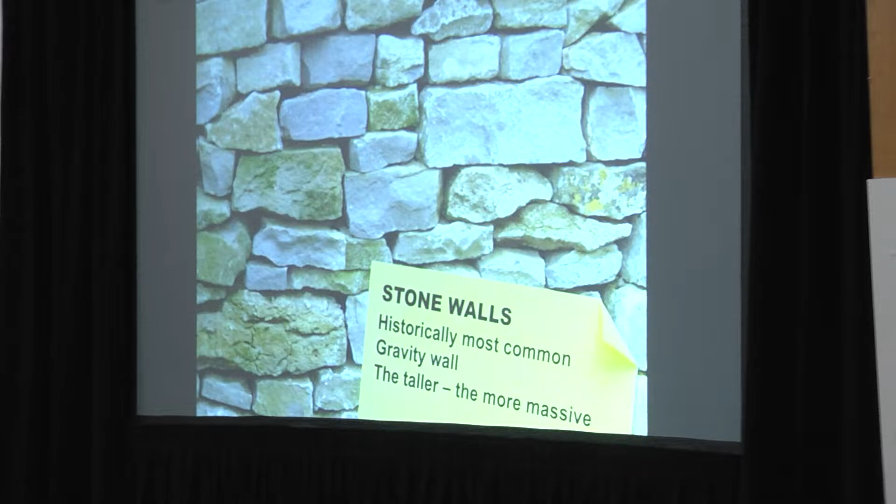All right, and then we got stone walls. This is like the old school. You still see them in St. Paul. There's lots of big gravity stone walls in St. Paul. Problem with these walls is that in order to push against the forces that are trying to knock them down, at the base, they have to be really wide, right? So you might have a 24, 36 inch wide base on these gravity walls, because that's how much weight you need to resist the force that's coming in behind them. So stone walls can get really expensive, especially once you get up above 3-4 feet.

So here's the traditional timber walls. Are any of you guys still building timber walls? A few guys? Cool. The wood is different, right? It's more of a pressure treat. It's not the creosote. It's not the same stuff. Doesn't last quite as long as the timber walls did 20, 25 years ago. When we do cost comparisons on them, it seems like block is a much better long-term investment. But there are certainly still applications for these. I've gone in and matched up and repaired timber walls. I try to talk people out of them.

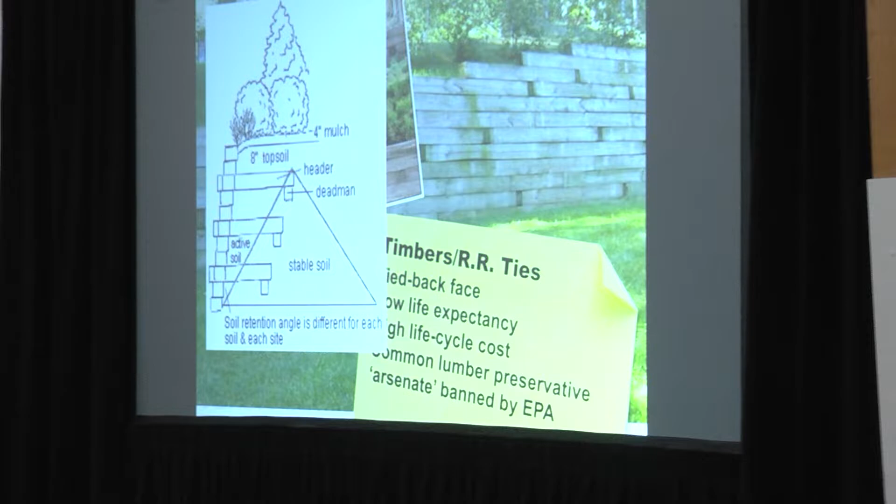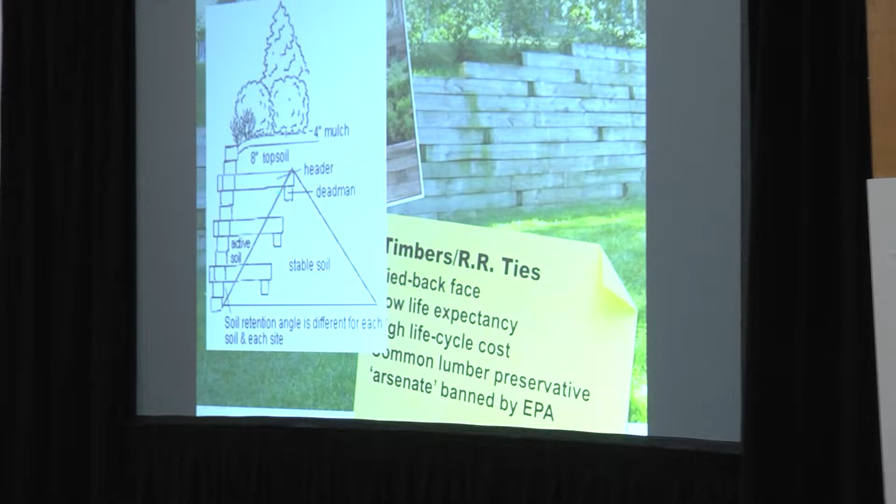All right, so a lower life expectancy. Here's the side profile. When we get into engineering too, we're going to talk more about this angle of phi or shear plane. That's like a phi. Have you guys heard that term? Angle of phi, failure plane, shear plane. It's got many names, called a lot of different things, but basically it's the natural angle at which any soil will lie. So we'll talk a little bit more about that when we get into engineering, but the main thing here is that our dead man anchors are getting back into this stabilized soil or sustainable soil.

All right, and then you got mortared walls. Mortared walls are going to be expensive. I don't know, might be up $90, $100, $110 a square foot for a mortar wall. You have to have a frost footing here in Minnesota because of freeze heave. So it does add a lot of cost, especially on shorter walls. Mortared walls, a different discipline, right? You're doing a block wet set and then attaching a veneer to the face of it. So it's a lot more labor intensive. Lots of codes on those for drainage and weep lines. So if you are doing those, make sure that you check your city codes.

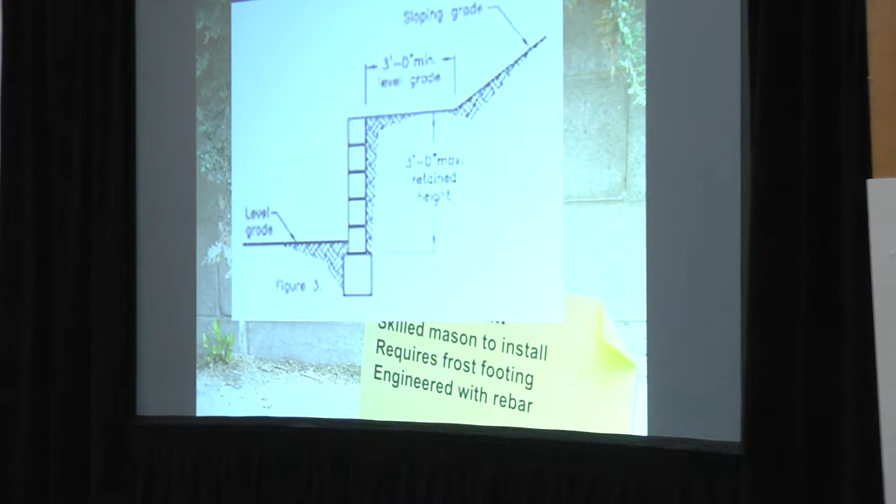And that's something that blew my mind when I first started using VERSA-LOK because, 20 years ago I was buying whatever it was, Menards block, and you'd have to break the back lip off. And then, what do you do about the setback, right? You're going to glue cheek walls 3-4 feet tall. It gave me fits, and so that's one reason VERSA-LOK is such a fantastic and flexible product, is that you can use the same block to build the retaining walls as you can the steps. You can do them vertical, you can do them with a setback, just lots of different options.

So VERSA-LOK is a gravity wall system, reinforced up to, we've built walls 40, 50 feet tall. I've been down to St. Louis, I can't remember if it's St. Louis or Kansas City. We're holding up a Walmart. The retaining wall is like 50-something feet tall. A fantastic product for going tall if you need to.

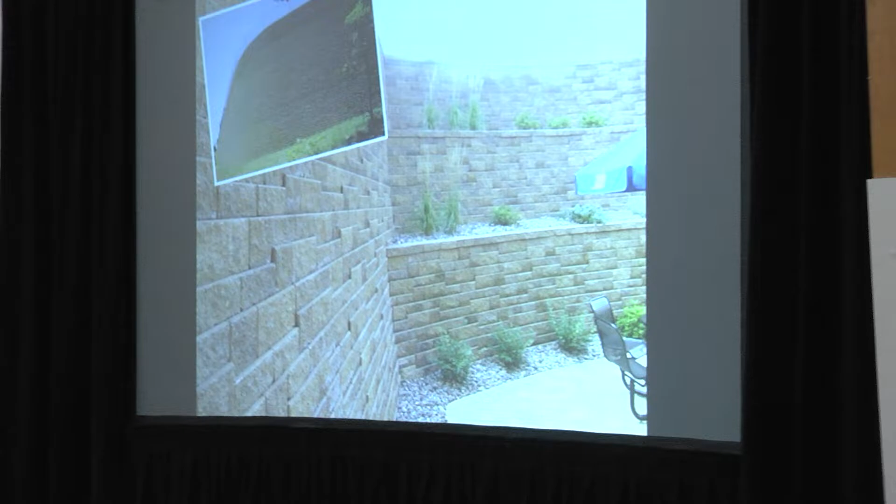Main thing I've found helpful when I'm explaining to younger guys that haven't done a lot of mosaic walls is think about those 4 blocks as 1 panel, right? So instead of thinking about, okay, I've got 6-inch block, 4-inch block, trying to add that up and how you're going to do step ups and step downs, all that stuff, don't think about those panels as 4 separate blocks. Think about it as 1 block, right? Once you pin it together, it's got that same structural integrity.

Weathered block is nice. It's a sales opportunity, right? Upgrade. We charge more for weathered block, just like stores charge more. My daughter came home with a new pair of jeans the other day, and they had holes everywhere. I'm like, I hope you got a deal on those air-conditioned jeans. It's January. Well, this is the same thing.

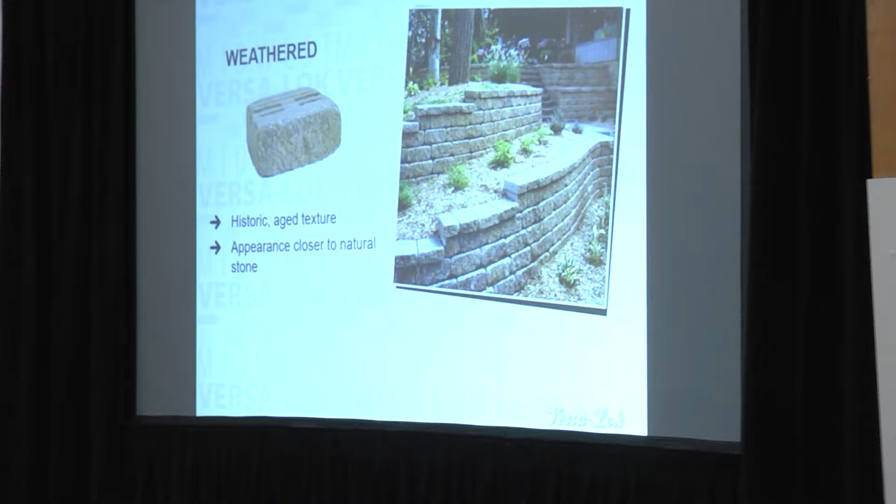We beat these blocks up. So they get tumbled a little bit, and it just gives it that rolled edge, kind of an old colonial look. So when I'm designing a project out at a cabin or maybe even on a historical property, an older house, a lot of times I'll look at weathered block and see if that's an option that fits my client's needs.

It just makes things so much easier when you don't have to think about, well, how many of these blocks do I need to order, right? You can just order a ton of standards, and if you've got one of these crackers, or if you've got a guy that's really handy with a hammer and chisel, you can modify that block on site to do a lot of different jobs.

And that's one of the things that really attracted me to VERSA-LOK starting out, is just that you don't have to worry about, oh God, we're out of corner units, right? Because what's happened over the last couple of years, we've had supply chain issues, we've had manufacturing issues, labor issues, all this stuff that's kind of compounded post-COVID in this world we live in. It's getting harder and harder to get special pieces.

And that's one really nice thing with VERSA-LOK, is that you do not have to order special corner pieces. You can split those blocks. You can split them to make odd angles. So if you need to do a 40-degree angle, you can split that block to accommodate it right on site. You don't have to pre-order any of these specialized blocks.

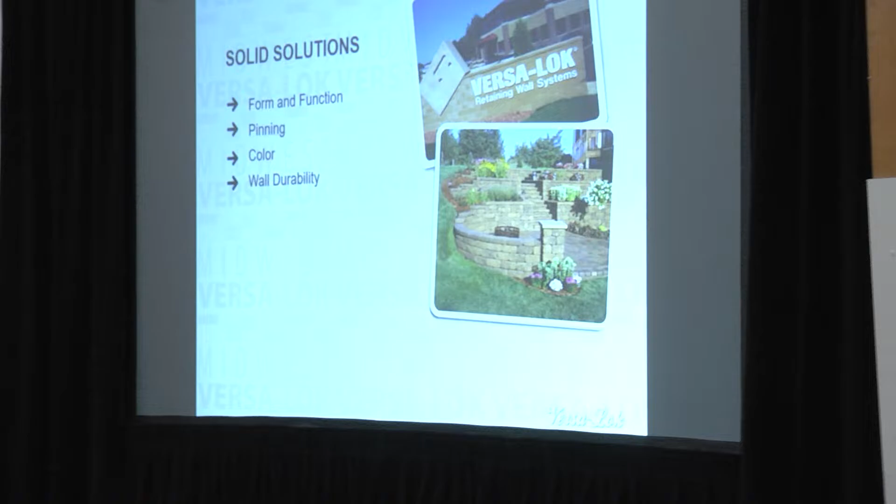Of course, we're a solid block. There's no hollow cores on the standard VERSA-LOK workhorse block. It's a solid concrete. That's what allows it to be split and modified. You don't have to worry about hitting that center void in the middle of the block. So you can split off center with them, and that's something we'll talk about a little bit more when we get into the freestanding applications. No cores, no lips, no mortar, no frost concerns.

So, some guys do pour footings. I've seen guys pour footings for small 3-4 foot walls. We refer back to the NCMA guidelines, right? And is anybody here doing the NCMA certification? Going to take the test and get certified? NCMA recommends just a gravel base. So, again, no requirement to dig way down and do a 4-foot frost footing. You can do a 6-inch gravel pad. We'll talk about how you can use that same procedure to do stairs, retaining walls, freestanding walls. It's all kind of the same game.

Straight face blends with surroundings. So what we're talking about there is, we don't have the old diamond-shaped retaining wall blocks anymore. Straight face just has cleaner lines. And that's one thing, again, with VERSA-LOK. You get really nice, clean lines and good consistency.

The worst thing about building with some cheaper blocks is that you might get one block that's 5 15/16, and you might get one block that's 6 and 1/16, whatever it might be. But variations in height kill me, because then you're shimming these things. It's a huge pain in the butt. That's one nice thing with VERSA-LOK is the height consistency.

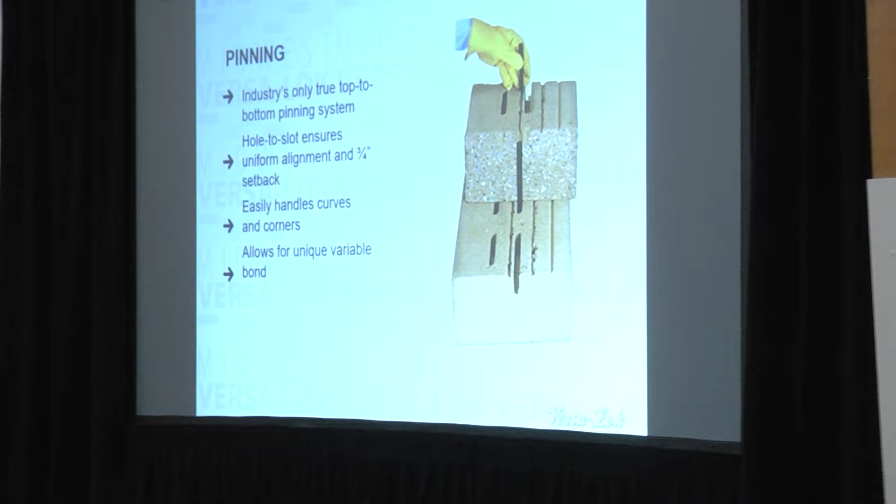I think this is going to show us that we can stack with a variable bond. Doesn't seem like that big of a deal unless you've built some big walls, right? You start doing corners. When you split these corners, you end up with an 8-inch wide block on this end here. And so it's real nice because it's 8 by 12, so the 12-inch side isn't gonna be on a perfect half bond. And when we say half bond, this is what we're talking about. You can see that this line right here cuts the block below right in half.

You can stack VERSA-LOK structurally sound on a quarter bond, which means you only have to have 4 inches of overlap one way or another. And the reason that's so important is because the pin that goes in here needs to drop into this block. Every block you pin needs to get pinned into 2 blocks below it. That's just the general rule. If you've got this block pinned into just 1 block below it, you get no structural integrity there. Those 2 blocks are just going to want to tip forward. So we're always trying to create a bond.

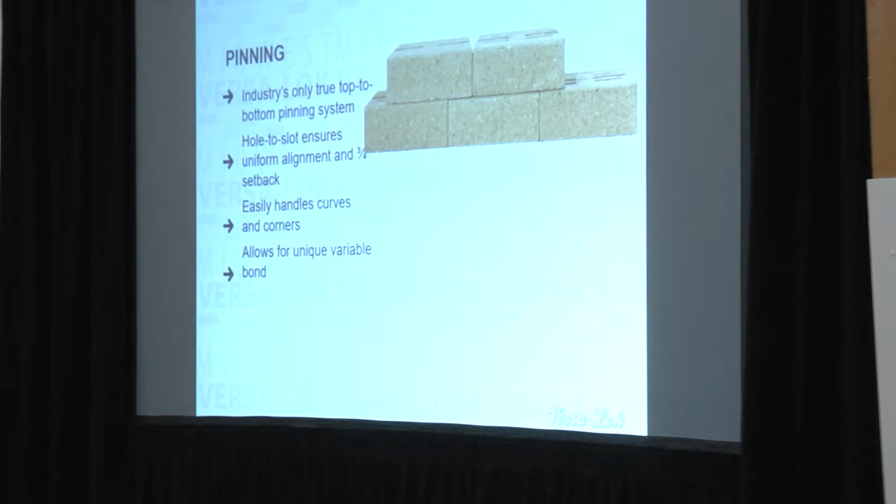And you can see 4-inch, 4-inch would be a quarter bond on a 16-inch wide block, and that's what we got with VERSA-LOK: 16 inches wide, 12 inches deep, 6 inches tall. So right here we're looking at a quarter bond with 4 inches of overlap, and again that's enough to get those pins down into 2 blocks below. Same thing is true with mosaic. You can actually pin, this would be probably more like an eighth bond almost, because all you got to do is get that 4-inch overlap right here.

This little cobble block, that's a half block, that's still pinning down into 2 blocks below it, right? And the same thing with the standard. The standard is getting pinned into 2 blocks below it. The only deviation with the mosaic is this little weird guy right here gets pinned into 1 block below. But because we're getting pins coming down and breaking these vertical lines, the engineers gave us the thumbs up on that. So that's the mosaic system, but again, variable bond pinning is a big plus when you're building large walls.

Kind of slide that around. That drives me crazy because we've got a line coming up through 3 vertical blocks. Anybody think that's okay? Yay, nay? When I look at this, it drives me crazy, but the engineers say it's cool. You can sign off on that. And it's because we're not looking at this as 4 separate blocks. We're looking at that panel as 1 large block. So even though that line comes up through part of it, this accent block breaks that bridge. And so you can go ahead and stack these things just like that.

Would I do that? I don't know. Looking at it drives me crazy. But again, engineers said it's okay. You got the sign off on that, so you can stack that wall up just like that if you prefer. It's closer to a half bond. And as an example, now we've got these 2 vertical blocks here. We've got the jumper, but this line is still in line with those 2 blocks below. So essentially, it's the same thing we were looking at before. Catches my eye, but again, it's structurally sound.

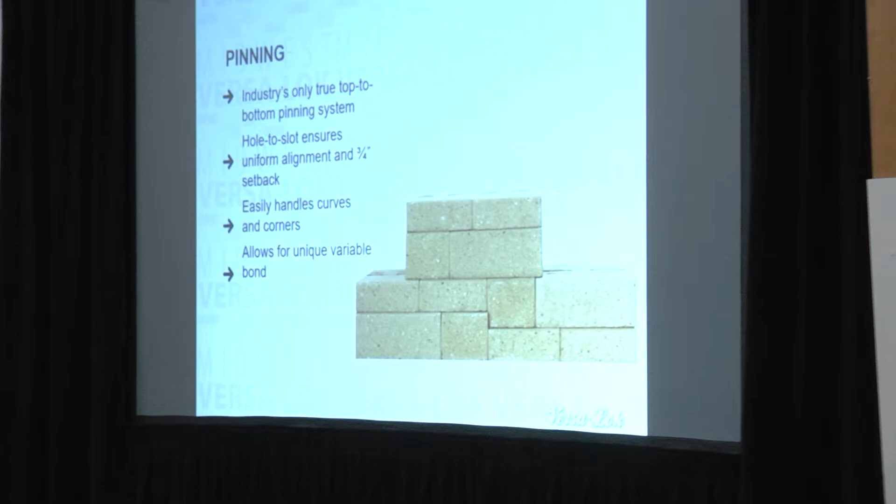Okay, so this is our square foot block. Square foot block, you do have to core fill. That's part of the engineering spec. So when you start reading into the square foot block and its capabilities, know that those capabilities are based on a core fill. So that's an extra step.

Anybody got any tricks? How many of you guys have done core fill blocks and have like a trick to keep the rocks from getting in those ruts or those spines of the block? So what I've seen a lot of guys do, and I don't build a whole lot of square foot walls, but if you look real close, what do you see right there? It's a little hunk of rope. So what they've done is they've actually run rope down through that rut because that's how you're going to pin your blocks.

And if you've ever had to get in with a screwdriver and wedge little clear rock pieces out of your retaining wall gaps, you know that that's a job nobody wants. So if you put a rope in here like that, you do your core fill, dump everything in, whip the rope out, and you've got clean lines. You're ready to stack that next row.

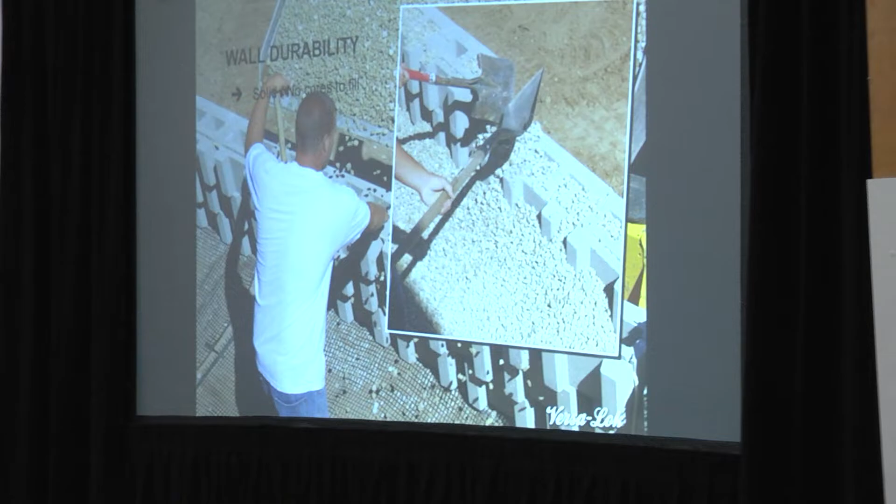Core fill walls are nice for drainage. You get a lot more drainage capability out of them. Again, it's just an extra step. A lot of times they're going to be lighter, so you can schlep them up on the wall a little bit quicker, but then you have to go back and do that additional step. Same thing as the standard block, high strength, low absorption, weather resistant.

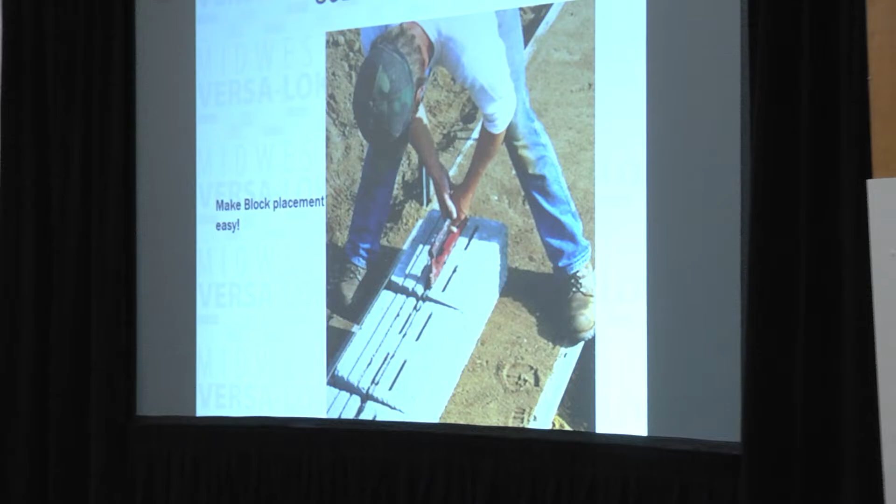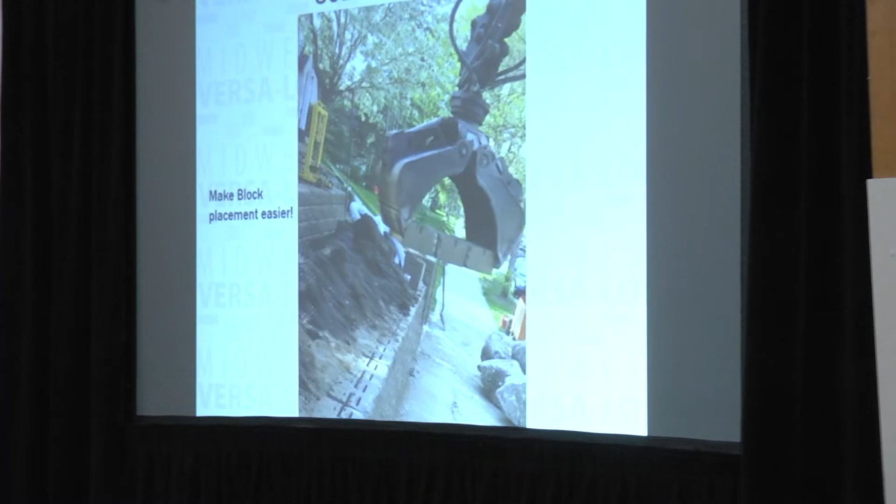Having that handle on there just allows you to be super surgical about how you set them, so you're not doing what I call a controlled drop, where you're setting your block, you're getting it close, and then you just kind of poof, let go, hope one corner doesn't hit first. That handle's a lifesaver when it comes to setting base. Pretty slick way to move them. Get a grapple bucket on there, and you can slide three blocks around pretty easy with that.

Every year it seems like blocks are getting bigger and bigger. You look over here, we've got Rosetta stuff. Some of these blocks are 2,600 pounds, so they're machine set. The nice thing about machine set blocks is that it's less manual labor intensive. In other words, the guy doesn't have to pick up every single block, schlep it, slide it around, score it, get it set just right. You have the machine do most of that heavy lifting.

And you're setting blocks that might be 2-3 square feet at a time instead of our 2/3 of a square foot standard unit. But with VERSA-LOK, you can transport several blocks, squeeze them together like that, and kind of do that cantilever.

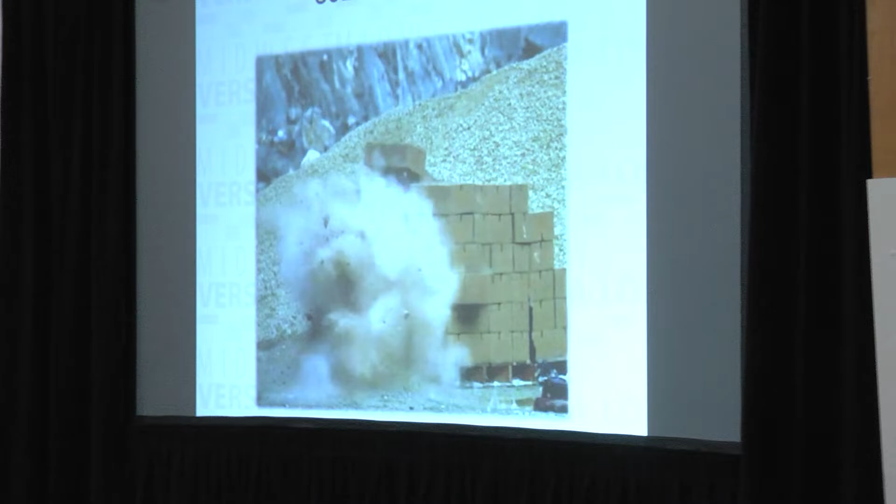I think we had the Mythbusters. You guys remember Mythbusters? Mythbusters launched a cannonball. I don't know what they were testing, ballistic speed or something. They launched a cannonball at these VERSA-LOK blocks, and I think the really amazing thing about it is how many of these blocks were still intact after this cannonball. You can see one kind of flying right now. I think that cannonball ended up in a house like 3 blocks away, if I remember right. Mythbusters got in trouble for that one.

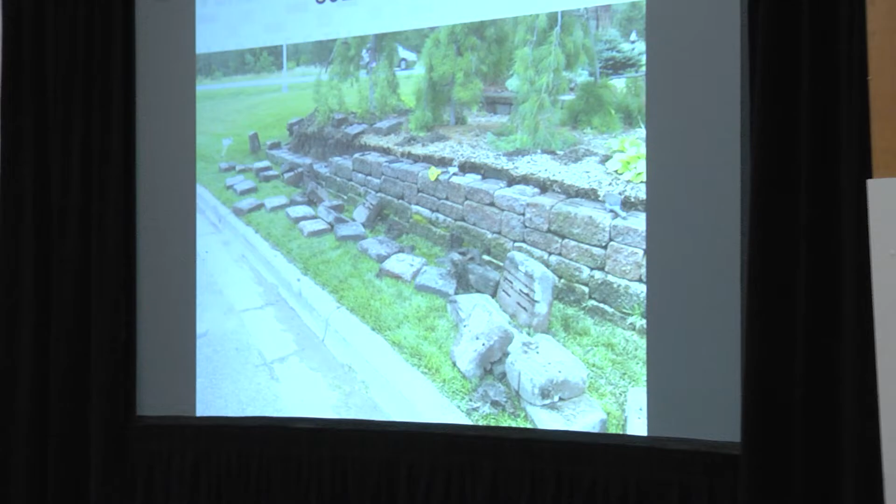Again, solid durability. We'll jump back. So, with a core fill block or a hollow block, if a car runs into it, it's going to break a lot of those blocks, right? And then you've got brand new blocks that you're trying to match from 10 years ago. Like we said, we strive for color consistency, but if you're talking 10 or 15 years, you're going to have to mix those together.

Well, this thing ran along the side of this retaining wall, and this is actually at headquarters in Oakdale. All these blocks could be reused. We had some glue on the capstone, so we did have to replace a couple of these blocks, but for the most part, they stayed completely intact.

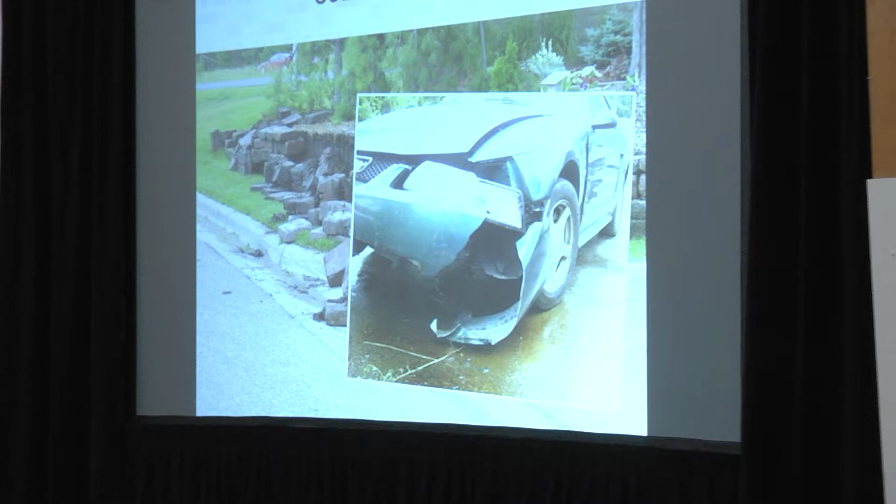So you can see this thing kind of being rebuilt. That's it after. See a couple new corner pieces here and a new capstone, but 95% of that wall is able to be reused even after you have an impact like that.

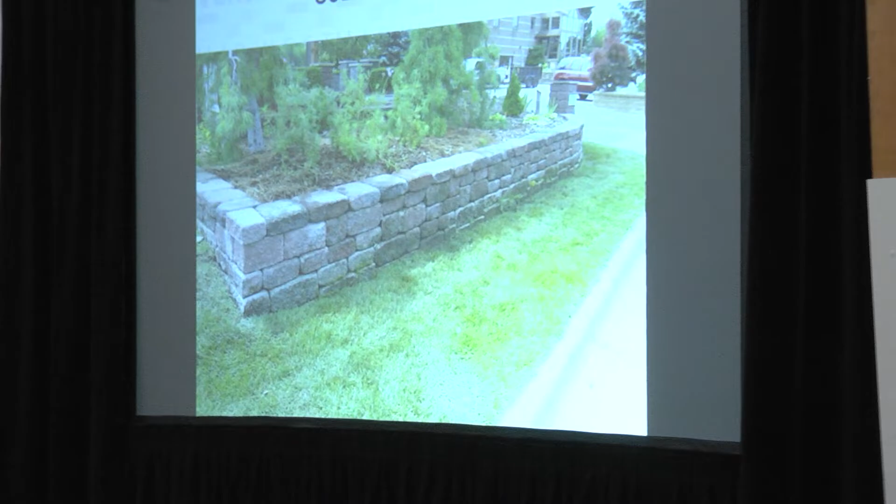If I remember the story right, that Mustang was a late night, 2 a.m. drunk driving stop. The cop tried to pop the cherries on, and the guy decided he was going to run, take off. Probably got going 50, 60 miles an hour on that little side road and spun out because he must have forgot his Mustang's rear wheel drive. So he slid into the retaining wall, smashed the car. In this case, I'm guessing that car was totaled, so the wall wins, because there it is, back up.

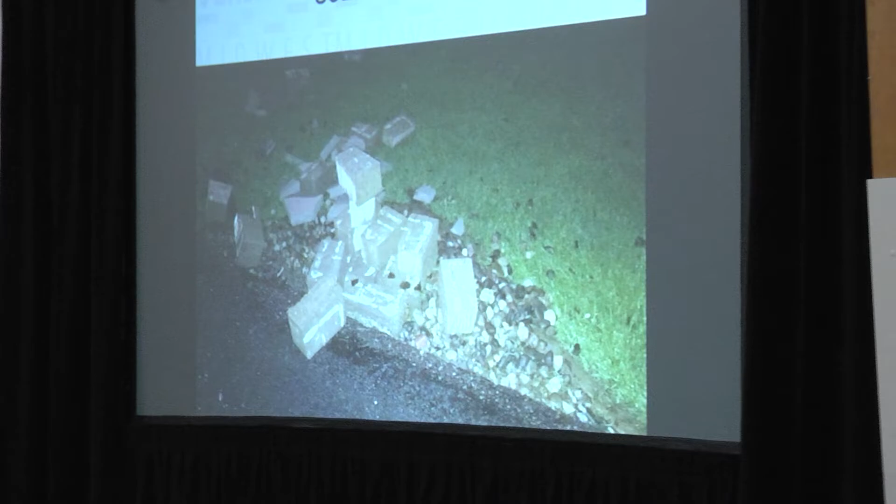And again, same thing with these mailbox pillars. How many of you guys are doing mailbox pillars? Easy money, right? The pillars stack up so fast once you base them out. But again, if it gets hit, you can just come back in and charge whatever insurance company is going to foot the bill for that. You can charge to just restack that thing.

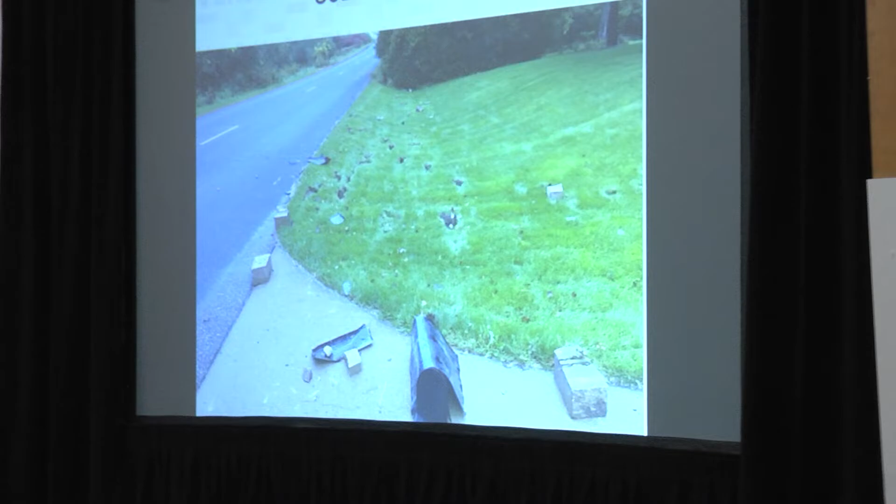And again, you can see there's parts of the car and the mailbox all over the place. But one thing you'll notice is these blocks are not busted. They're still in one piece. So again, you can just pick those things up and restack them. Yep, and that one looks like it lost the battle, battery hanging out there. But that's the car that hit the mailbox. So that dude had a bad day. And there it is, restacked, good as new.

All right, so we've talked about design flexibility, inside-outside curves, multi-angle corners. We'll get into more of the specifics on radius, multi-angle corners, stairs, all that stuff when we get into the engineering section. But for right now, we just want to touch on this stuff. A lot of this stuff's going to be repeat. When we get into engineering, I'll try to earmark some of the stuff that I know is on the NCMA certification test. So if you guys are going to be taking that, hopefully that'll get you prepared.

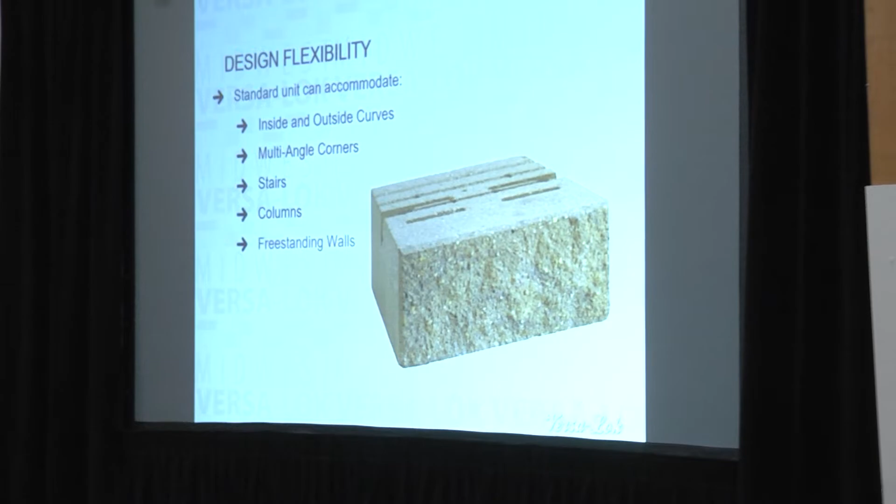Stairs, columns, freestanding walls. Personally, this is how I started splitting block. I used a hammer and a chisel, and I still enjoy doing it. It's still kind of fun. There's something caveman about it. I just like it. But you buy a splitter like this, and that's going to speed you up by 3-4 times. The ability to do that is huge, and that's, again, what we're referring to with design flexibility.

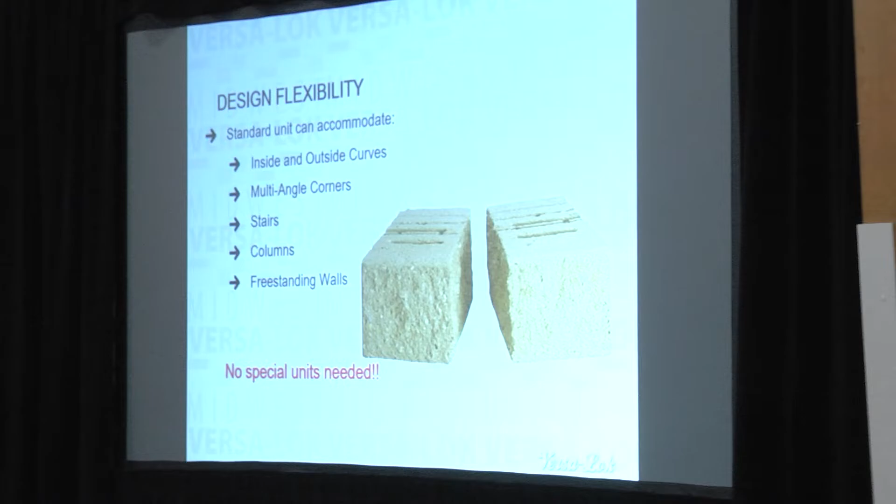You can do off-center splits, on-center splits. You can split the back end of this off and create a freestanding block. There's just tons of different options all brought together in this one simple little retaining wall block.

This is super important. Outside radius, max radius with VERSA-LOK is 8 feet. So if you're building a 3-foot tall retaining wall and you start your base out on an 8-foot outside radius, as you stack up, that radius shrinks, right? Because we have a 3/4 inch batter per vertical row.

So if you were building a circle planter, your second row above your base is going to be 1.5 inches smaller than your base row was. So if you start your base out at an 8-foot outside radius, by the time you get up 2-3 rows, your blocks are going to be splitting at the face.

Now we've got some tricks that we can do, so if you get stuck in a position like that, you don't have to pull the whole thing apart. There are some tricks of the trade there, but it's very important to make sure that your guys that are basing these walls out know not to set it at the maximum outside radius on that base row. Give yourself 9 feet. Give yourself a little bit of breathing room there so that as you build vertical, you don't start to separate at the face.

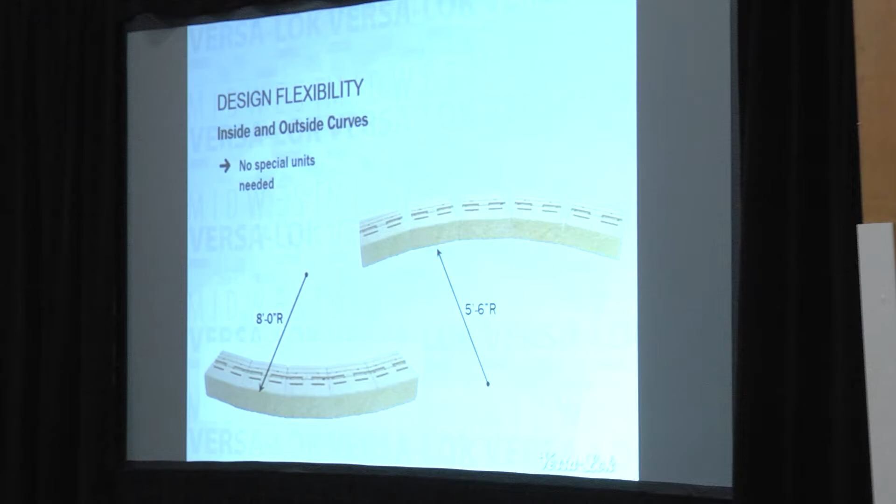Same thing is true with inside radiuses. So here we can turn 5.5 foot, which is pretty tight. And the reason that we say 5.5 feet is because we're telling you that you can pin on quarter bond. So if you can pin on quarter bond and you go tighter than 5.5 feet, your pins are going to start to drop into these gaps. So they're not going to give you any structural integrity, and that's why we say 5.5 feet is really the maximum inside radius you can do with VERSA-LOK.

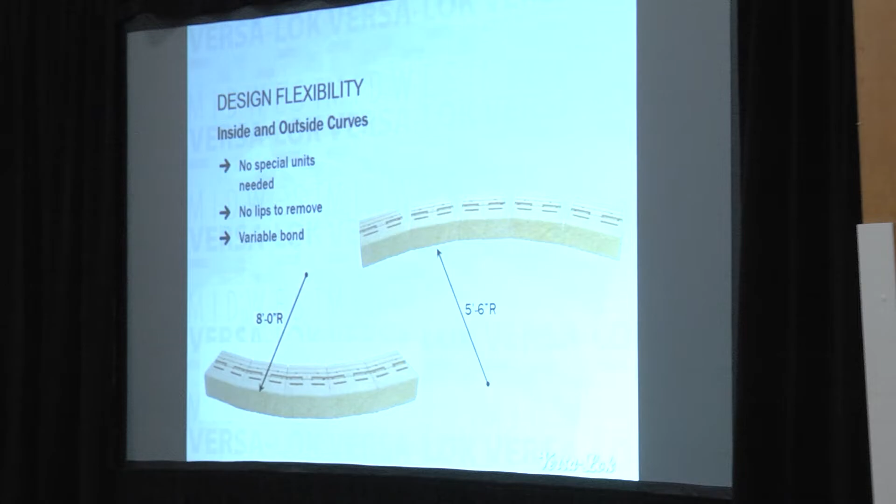No lips to remove. If you're turning a tight corner, you don't have to worry about modifying the block. That used to drive me crazy. I'd buy a new block, and then I'd have to beat the crap out of it with a hammer to get it to work. It's one nice thing with VERSA-LOK, there's no lips you got to worry about knocking off.

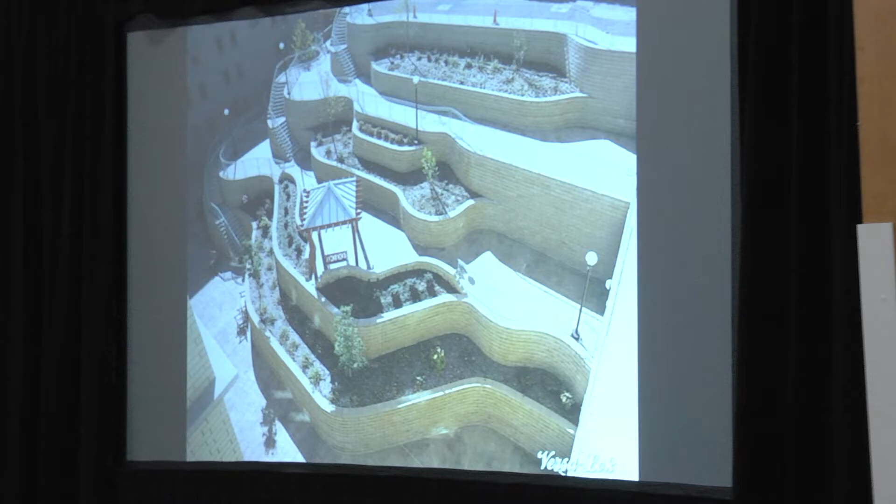And again, design flexibility. This is a picture we've been using for years, but there's so many different elements in here. We've got stairs, inside curves, outside curves, angles, freestanding applications. There's just a lot going on. As you master your craft and you get better and better at building these retaining walls, you'll build a new appreciation when you see a project like that, because there's just so much going on within just that little space.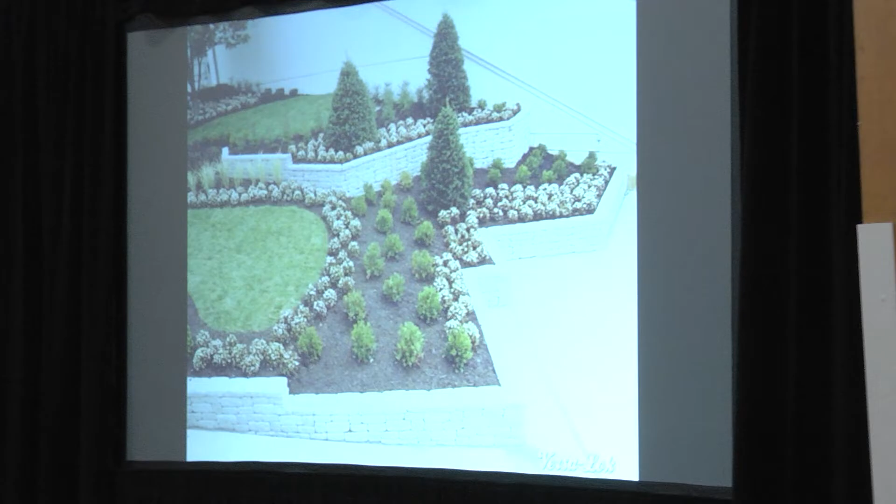Your design capability is completely, there's no glass ceiling on it. It's an open book. You can design whatever you want, and that's one thing I really find to be a lot of fun with VERSA-LOK, is that you don't have to worry about a lot of the same things that you do with some other manufacturers.

Inside 90s, this is probably the easiest VERSA-LOK corner to do. As you go vertical, you just want to make sure that you're swapping back and forth, right? One question I get a lot is, do you have to pin that corner? What do you guys think? Yay or nay? Do you need to pin it? Whoever said no is right, no pins required there.

I usually put a little dab of glue on this corner just to lock it together. I don't know if it's a necessity, but I just like it. It's cheap insurance. So I'll put a dab of glue on that inside corner right there as I'm stacking. I will pin the other side of the block. I'll drop a pin through here into this block, but then this inside part here I'll glue.

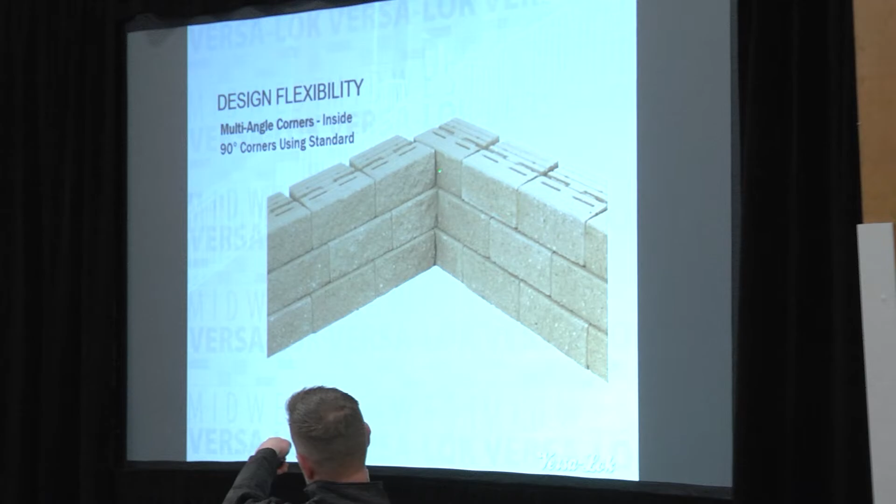One other thing that happens, and I don't know if you guys have built walls that have large inside corners like this, but as you stack, you'll see that this gap kind of gets created right in here. So when you go to cap this wall, you're kind of feeling like, wow, this block's hanging 6 inches over that edge. What am I going to do about that? Some guys do shim these corners. So if you got a block that you're breaking, whatever it is, you can stack another little row of block back there just to support the capstone.

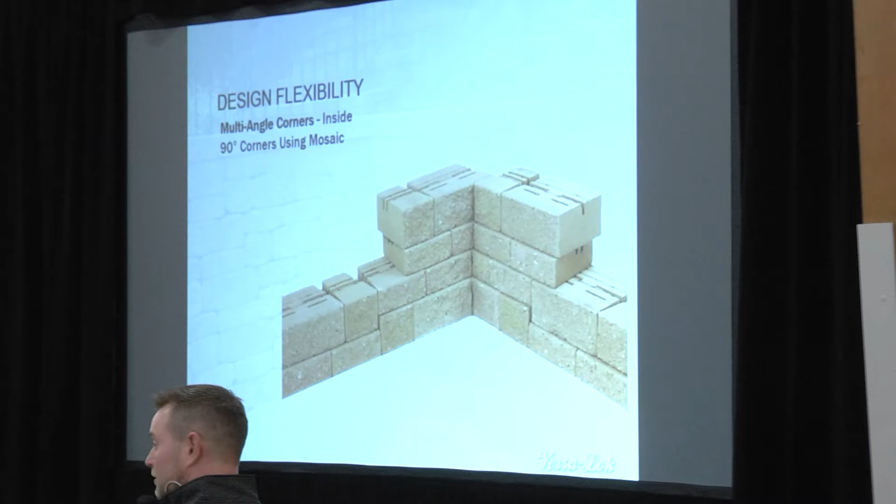And again, there's inside, outside. Same thing with mosaic. It gets a little bit trickier with mosaic, and that's again why we recommend the field guides. It's the same game with the inside corners, but it's a different game with the outside corners. We'll kind of run through that. So there's an inside and an outside.

And that's how you're going to split your standard outside 90. One thing I see here that I always point out is that we've got these lines on the top of the block, right? Those lines, they're there as part of the manufacturing process, but super visible in this picture. You can really see, it almost looks like a little tiger claw or whatever on the corner there. So what I'll train my guys to do is flip these blocks over when I'm building a pillar or an outside corner.

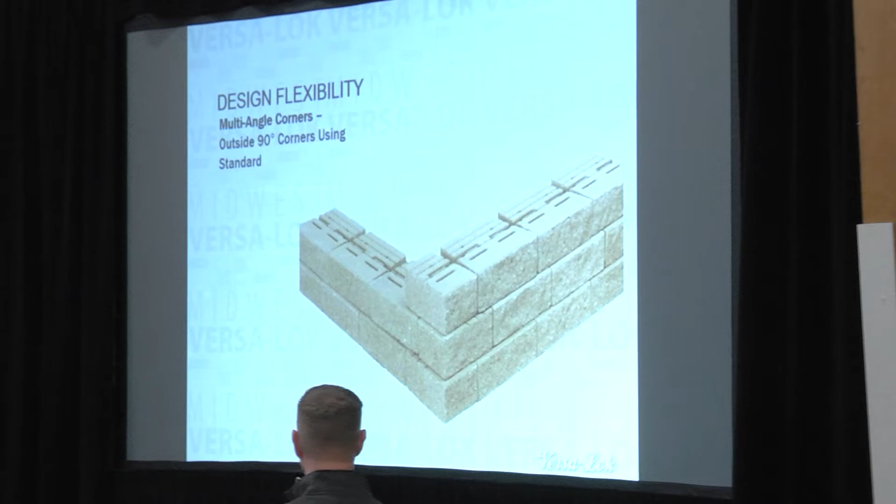And you'll see that right there. Here's the before, and there's the after. So you can see it's just a much cleaner look. To me, it's kind of that professional polish that separates the DIY weekend warrior guys from the guys that do this for a living. Minor detail again, but we're all here to master our craft, and any little tips that we can share with each other, it's a win for all of us.

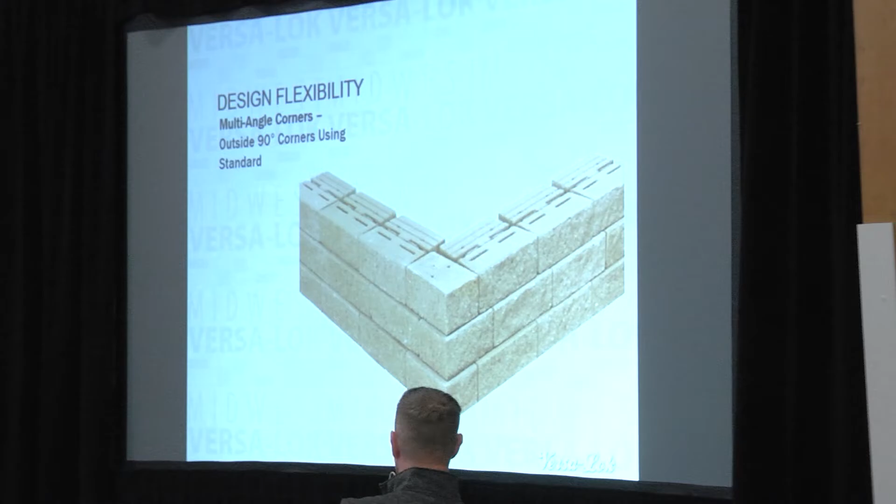So flip those corners over, and you can see right here again, that's evident right there that one's not flipped and that one's not flipped. So I look at that wall and I'm thinking Joe homeowner built it, or he hired the guy that mows his lawn to build it, right? He didn't hire a retaining wall company to do this wall.

Step downs. So we talk about two different kinds of step downs, right? There's a step down on the base of the wall, and then there's a step down on the top of the wall. This is referring to the top step down. So we've got this block right here that we split. That way it's got a rough face texture on 2 sides instead of just the face.

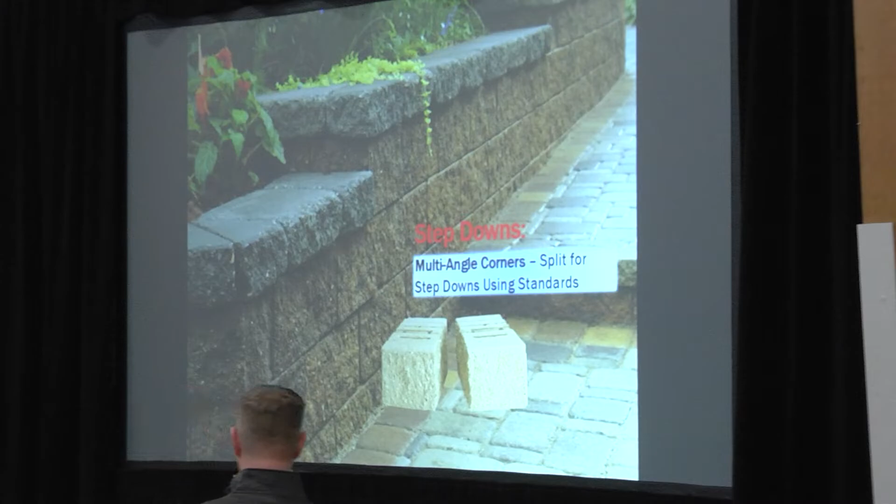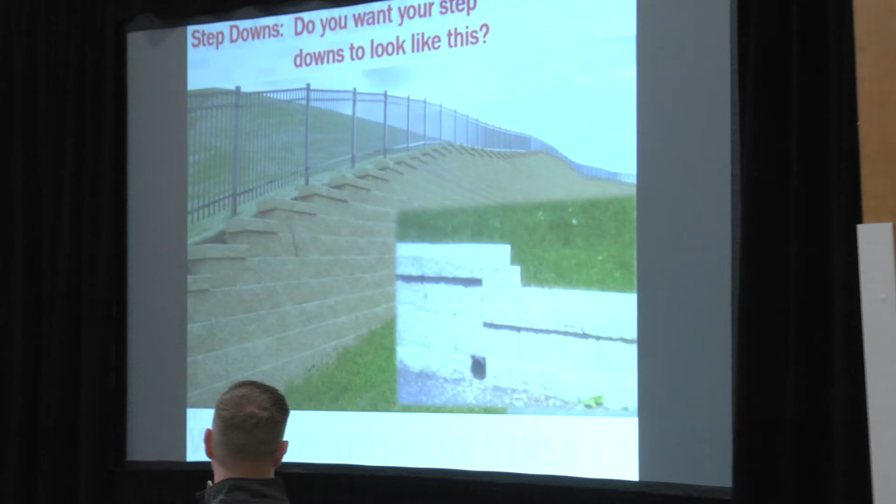Again, these grates, right? Talked about drainage a little bit. We just barely touched on it, but drainage behind these retaining walls is essential. And so you're gonna have a drain tile behind almost every retaining wall. There's a better way to do that, right? We get a grate, we cover that up, make it look polished, make it look professional. It's all these little things that you can do to separate yourself from the fly-by-night guys.

And there, again, that's the split face. It just looks finished. It's more professional. To me, that looks like a polished retaining wall. I can tell whoever built that and put that together knows what they're doing.

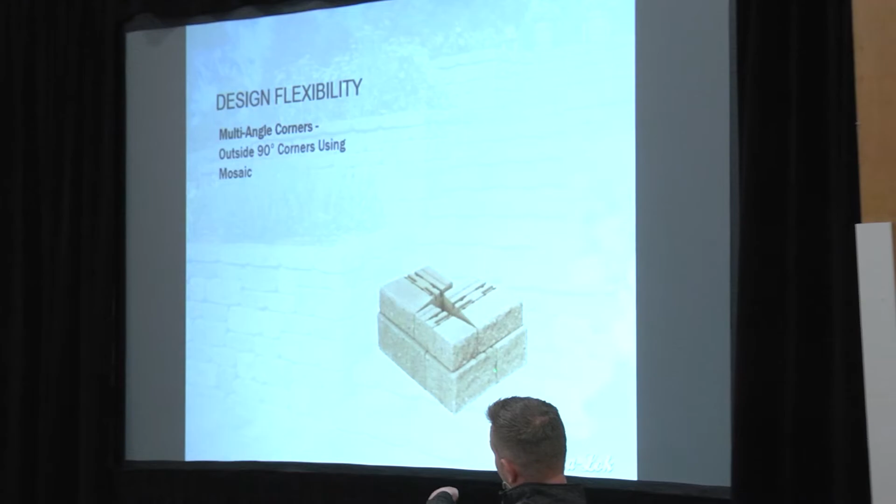So mosaic, I told you the outside corners are a little bit different, and this is what I mean, is that you're actually gonna have to split this accent block as well. And then you can see this corner split down here, we had to make a cut. So it's one extra piece of fabrication that you have to do when you're talking about a mosaic retaining wall. That's all in the field guide. So if you do have a mosaic wall, talk to your rep, make sure that you get a field guide.

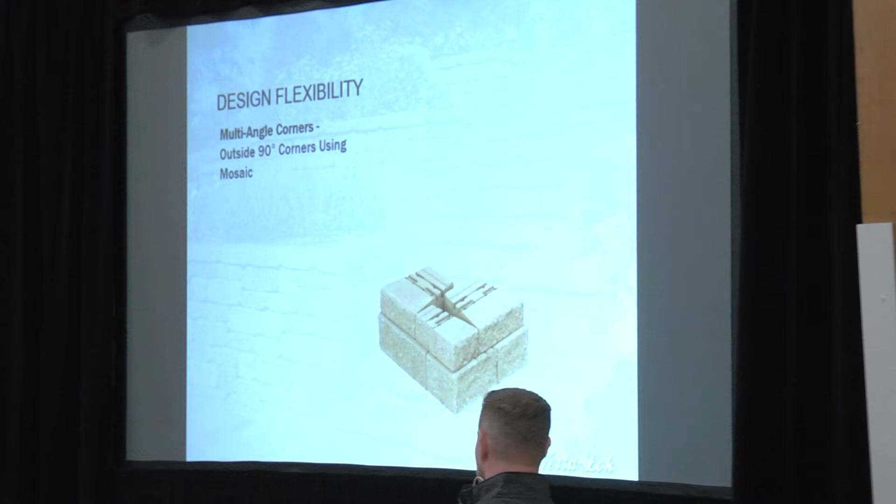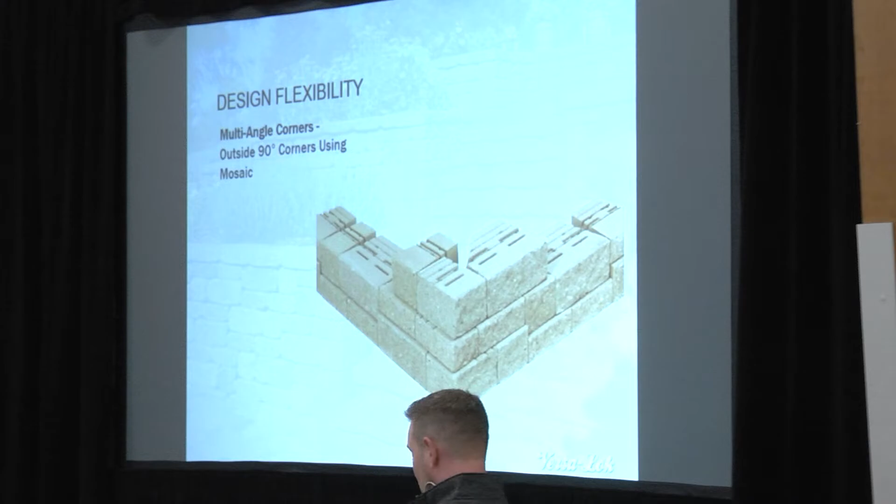Same thing is true with mosaic. Once again, we're gonna wanna flip these blocks over so that we're not looking at those tiger paws on the corner. But you can see how easy it is to stack that up. And again, why it's so important that you're able to stack and pin on a variable bond so that you don't have to cut little shim blocks in.

If you're working with a block that has to be on a half bond, you're gonna have a bunch of weird little cuts on corners because your wall length's always changing. Just like on a circle, the radius is gonna change with the height of the wall. Well, same thing is true when you're talking about these corners. So if you got a setback, these cheek walls are going to change in length, right? So eventually you're going to have to cut a weird little slug in. And again, that's just a big advantage with VERSA-LOK, is not having to cut little slugs into your block wall.

We're going to show you how to do this a little bit later. But when we talk about multi-angle corners, we're able to do 40 degrees, we can do 30 degrees, whatever it is. We can modify the block to fit the angle that we need, and it's as simple as just cracking this corner off. And now in this picture, we see this back corner is split off.

If I'm on site and I'm fabricating that block, I'm gonna cut that. I want that to be a clean line because you are gonna see that at the face of the wall. And you can see that right here. So that's gonna be a nice little cut. We've cut more of an angle here than we do on this split. That way you leave a little bit of gap in there. That way those blocks aren't trying to separate at the face. But again, one split, one cut, and you can modify this block to do so many different jobs.

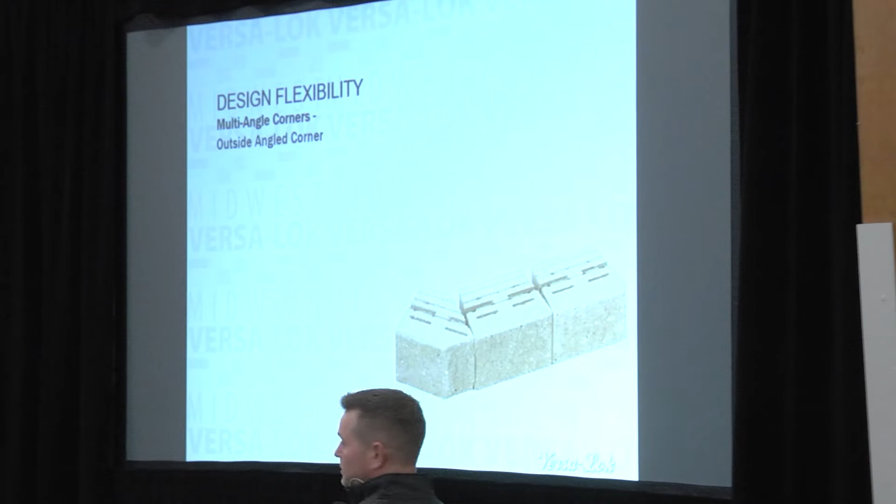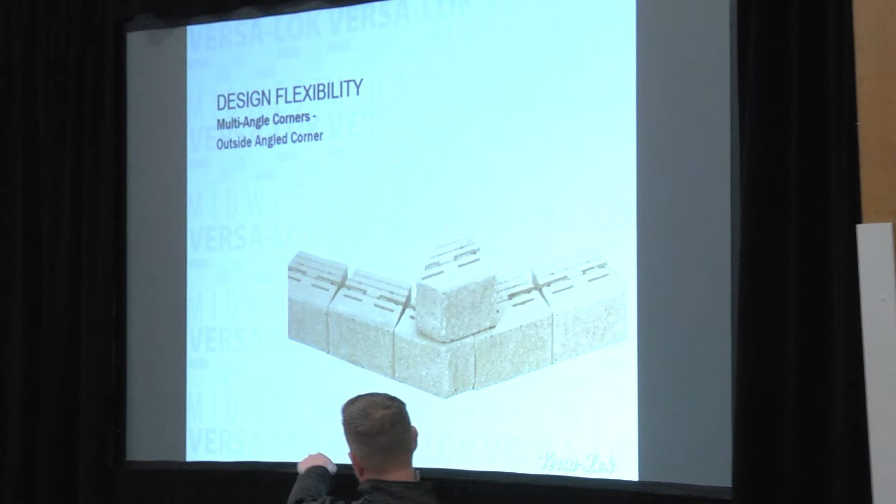When we're doing these, we're gonna make sure that we're overlapping our joints. Again, we're always trying to create bond. On most of these angles, it just so happens that little cut right there is gonna be about 4 inches. So I know it's a little bit out of proportion, but this should be about a 4-inch gap right here. That way when you stack that block on, you can see that the receiving slot is gonna take the pin. That way you've got structural integrity.

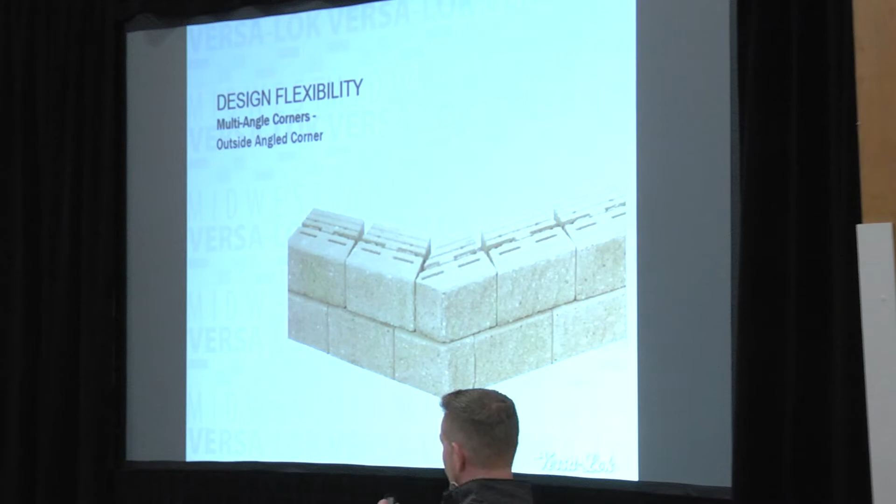So you're just gonna flip these things over, and again, I'd put a dab of glue on these outside corners as well. You're gonna pin the outside edges. Out here gets pinned. Inside, this is all just gonna get glued. So we're just swapping that back and forth.

You got to be careful on these, because if you try to split this, I want to go back. If you try to split this and you get too close to this slot right here, you'll see that it'll actually show through, right? And so at that point, you've ruined that block. That block's not good for anything but a door stop, or you can use it as a backfill item, whatever it is, but the block's toast. So you do have to be careful, make sure that you're keeping off of that little slot right there.

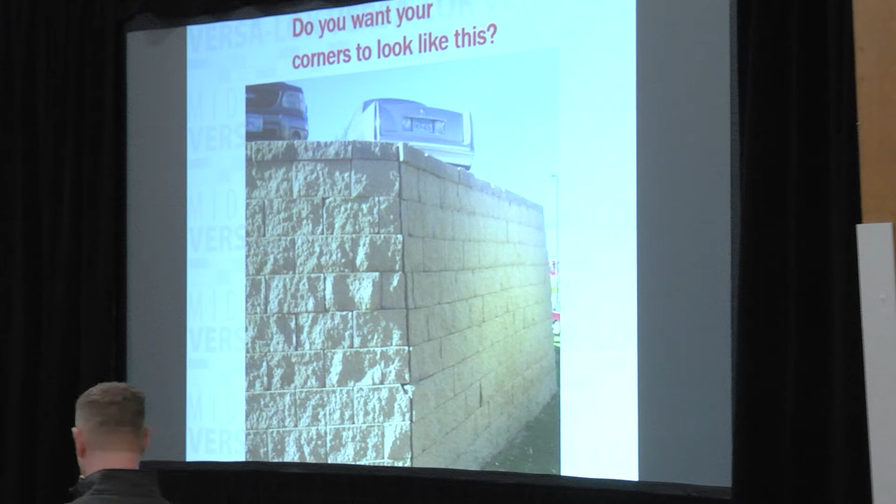So, you never want a vertical line on your corner like that. You're always trying to create a bond. I'm sure you can immediately see the difference between what VERSA-LOK's recommending for its outside corners and what this guy did. He tried to miter it. He tried to build it like it's a picture frame. Well, it's not a picture frame. It's a retaining wall. So bear in mind that when you're doing this, you never want to have vertical seams like that go up through 2 or 3 rows of block.

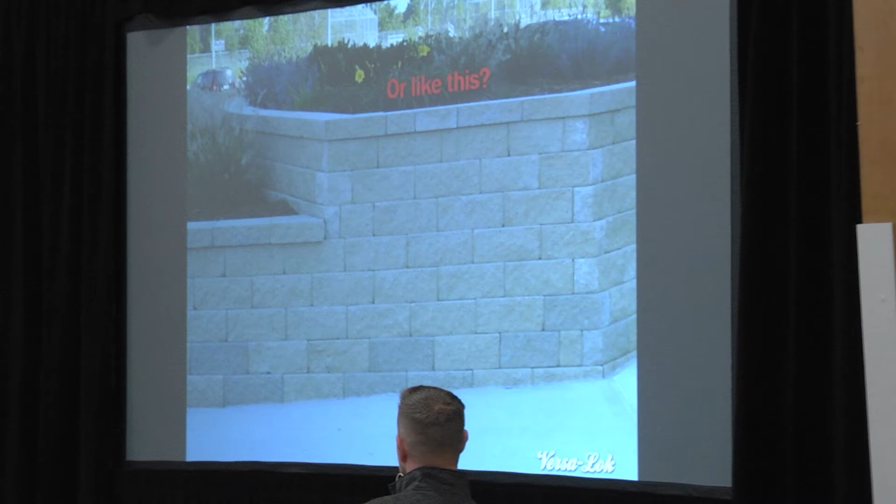But those little bump outs, you can take a chisel and you can kind of see it here that he's scraped away a little bit on that corner just to get it nice and flat. But again, you got to be a little bit careful when you're making those splits to avoid those bump outs.

Same thing is true with VERSA-LOK on inside corners. Multi-angle inside corners, easy to do. We're going to use a jumper with this system. So instead of just stacking like we did on the inside 90 degree, we're actually going to use sort of a bridge block is what we'll call that.

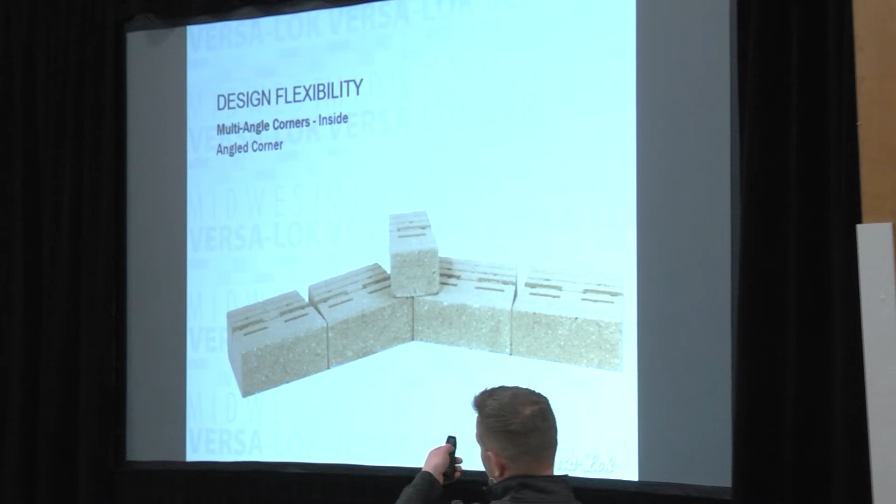This is another situation where I might actually base out another little block back here in that gap just to support the back of this block, depending on what the angle is. If you've got a really aggressive angle, you're going to have a really wide gap. So you might have to get something in there just to support it. I'd probably put a dab of glue on it, slap it together, cash the check.

And again, because we've got an 8-inch wide block here, we're immediately on bond. We're immediately on a half bond. We don't have to cut a little slug in. It's all done for us. We can just keep stacking.

And that's one thing with these walls too, as you build bigger walls, last thing you want to be doing is taking one hat off and go and put another hat on and start doing something else. You want to have assembly line, like I was thinking about Henry Ford, assembly line efficiency on your job sites where you've got guys doing the same thing over and over. Repetition, repetition. If you can have a guy just keep stacking, another guy pinning, you just keep those guys rolling, you'll have a wall up in no time.

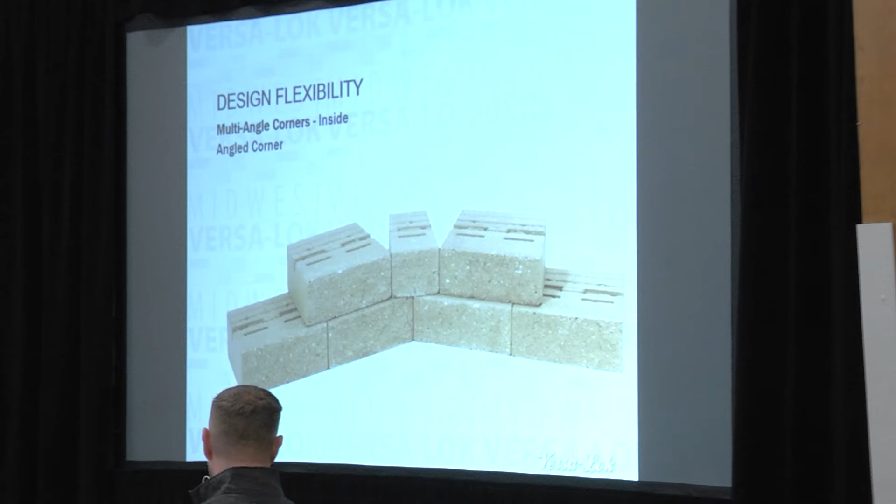But if you got to stop and putz around and break little pieces and cut little slugs, stuff like that, you got to go get the gas saw fired up. Jimmy probably put diesel in the fuel can instead of mixed gas. And so again, you got to change gears, do something different. It's always going to slow you down and reduce efficiency.

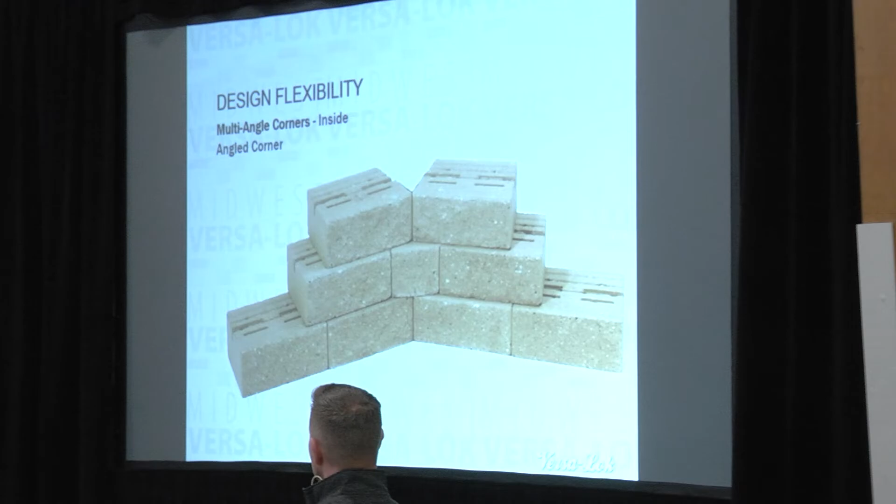So here, we just use the jumper, again, dab of glue, pin, and that wall's done. Really nice professional look on it. You do miter the capstones. I hate when guys leave big gaps up there on those angles. You want to make sure and get that cut as clean as you can, but that's really the only cut required because VERSA-LOK does sell these cobble units. So you don't even have to cut those. Those you can just pre-order if you want to. If you don't feel like pre-ordering them, you can modify the block on site.

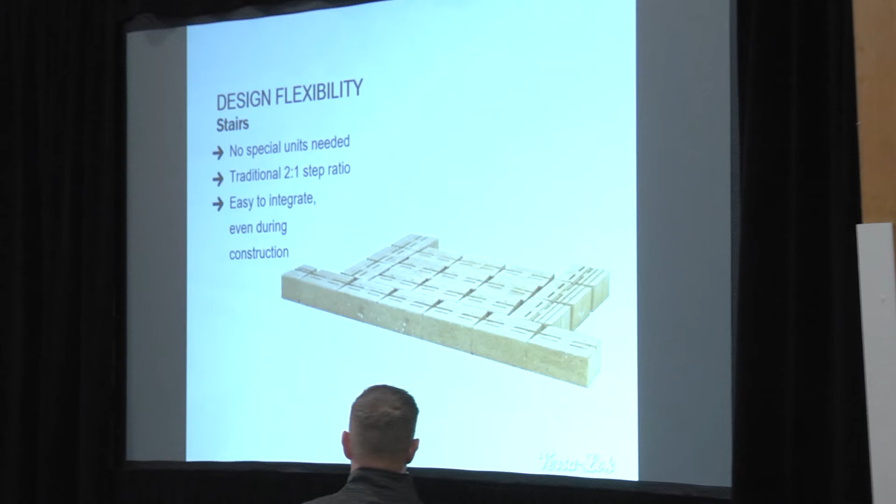Stairs, so again, you can use the same block for steps, and this is called a pedestal step. So what we got here is you got several blocks back from the face, and then we're just stacking. And guys look at this like, wow, you're wasting a lot of block, right? You're burying a lot of retaining wall block there. But what you're losing in material, you're gaining tenfold in efficiency because you've set up a platform for these stairs where you're going back 4 risers. So instead of stopping again, taking my block stacking hat off, getting gravel, packing gravel in and setting each step individually, I can set 4 at one time, and that's going to speed you up exponentially.

I make sure that I get a little bit of overlap. I like just a little bit of overlap on these. What I mean by that is that the face of this block is just coming onto the back lip of the block that it's setting on, and I'll run a glue bead along that back and then set that block down. Do you need glue on these back blocks that are all going to be buried? I put it on there. It's cheap insurance, right? And there's a guy selling that glue that's got to feed his kids too, so use the glue. Get it all locked together really nice, and they'll last forever. I've been building steps like this for 20 years. I go back to my old jobs, I drive by them. These stairs hold together forever.

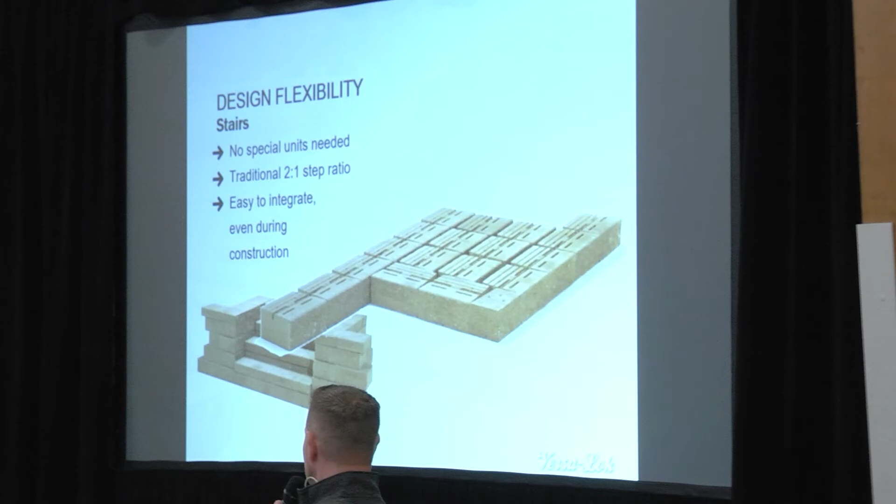Here we're going to do an exposed step where one side is going to be exposed and the other side is going to be hugging a retaining wall, but it's the same method. All we're really doing is creating bond in here, and instead of stacking these blocks corner to corner, we're going to stack them back, and you'll see why in just a second. Again, we're just splitting that corner block. So we get that corner block split, stack this block so we got a little bit of overlap, and that's going to give you a vertical outside profile unless you're snugging up to a wall that's got that 3/4 inch batter. So say this is a mortar wall or a house foundation.

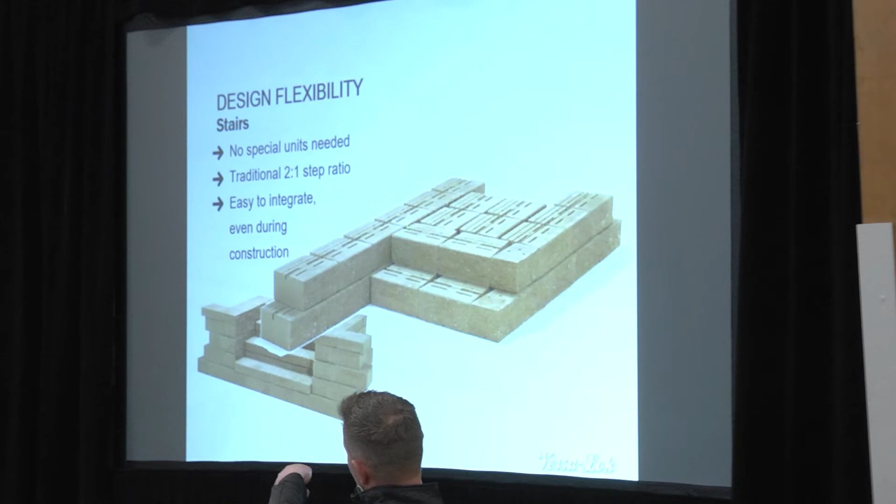This outside, and it is important to know as you're planning these projects out, this outside is going to step back 3/4 of an inch every single row when you're stacking it next to a VERSA-LOK retaining wall like this. If you're stacking against something that's vertical, this outside cheek wall is going to stay vertical as well. So just make sure that you're planning for that. But you can see again, 3/4 inch step back. We're just stacking blocks on blocks, gluing everything together, and then we'll cap it.

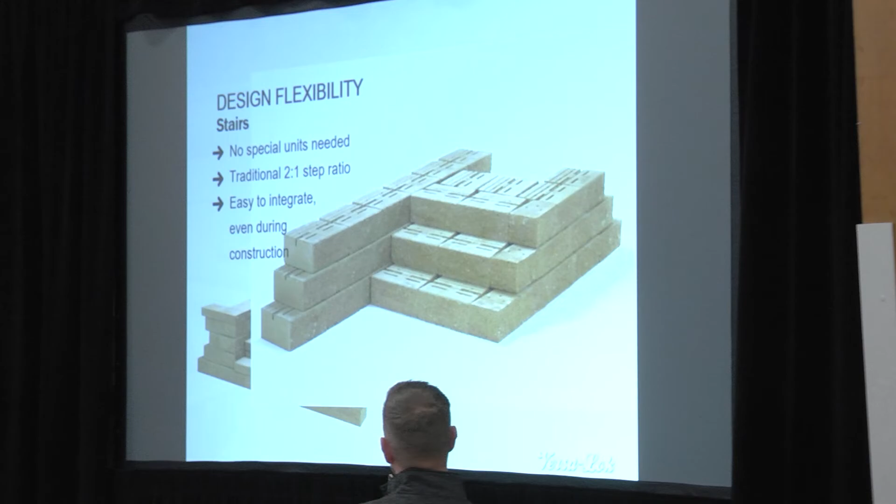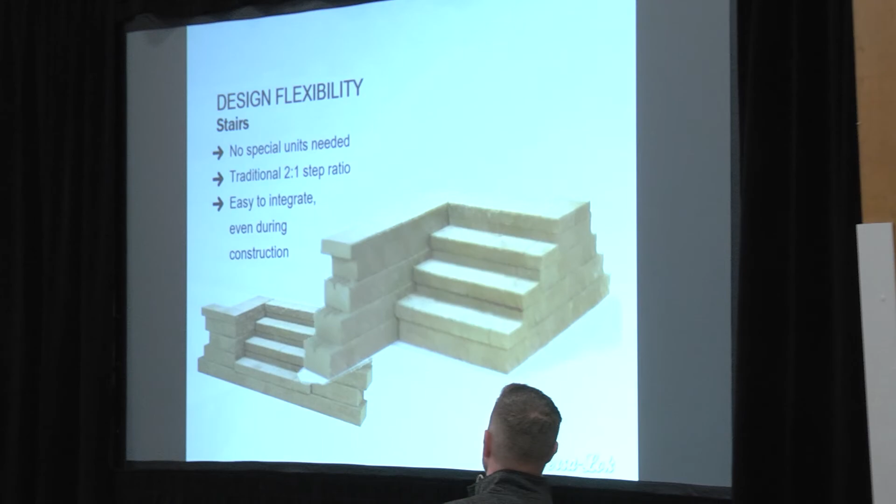So pretty much the exact same procedure that we use on what we call an inset step, and that's what we went over first. This is our inset step. This is what we would call an exposed step. So that's capped, done. Cashing the check on that one too. And this is going to be exposed on 2 sides.

One thing about VERSA-LOK, because you've got a 16-inch width, you know that 3 blocks are always going to be 4 feet, right? 16, 32, 48. So 3 blocks makes a nice wide 4-foot tread. If you go 2 blocks, it's going to be a little bit more narrow, 32-inch tread, depending on space allocation and just overall design. I've gone both routes, right? Not everybody likes holding hands while they're walking up the stairs, so 32 inches is really plenty for one person.

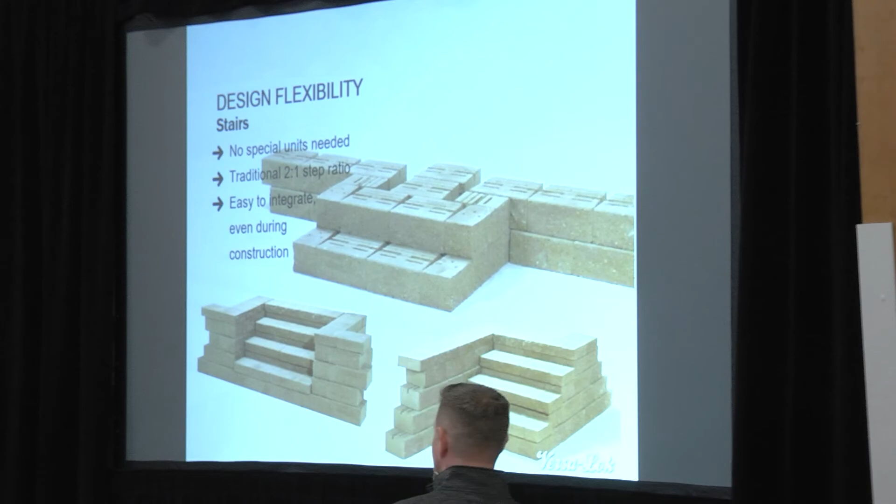I still charge a ton for steps because you're not just building a retaining wall and stacking block. You have to stop, you have to modify block, maybe fabricate some stuff on site. It all takes time, so make sure you're charging accordingly for all that stuff.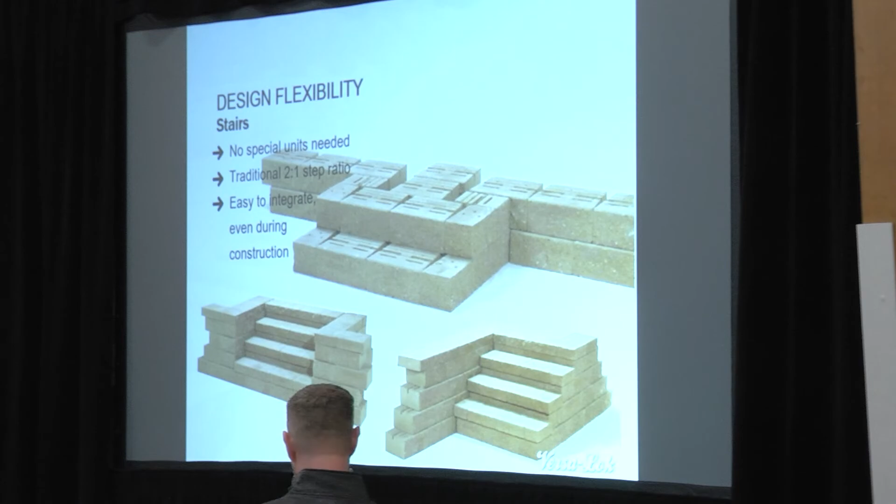Same thing, cap it off. You can use bullnose or standard caps, but VERSA-LOK allows you to do so many different jobs with the same block. And again, that was one thing that was super attractive to me as I started out in the industry. So you can see here, these are those preformed caps that we've got over here. We've got black and a light gray. We make a 2-foot wide runner, and then there's also, I believe, a 16-inch beveled. We still making that? The beveled? Yeah, okay. I like the 2-foot straight ones. Only time I would move away from that is if I'm doing a curved seat wall, and I don't want to have to cut every single capstone.

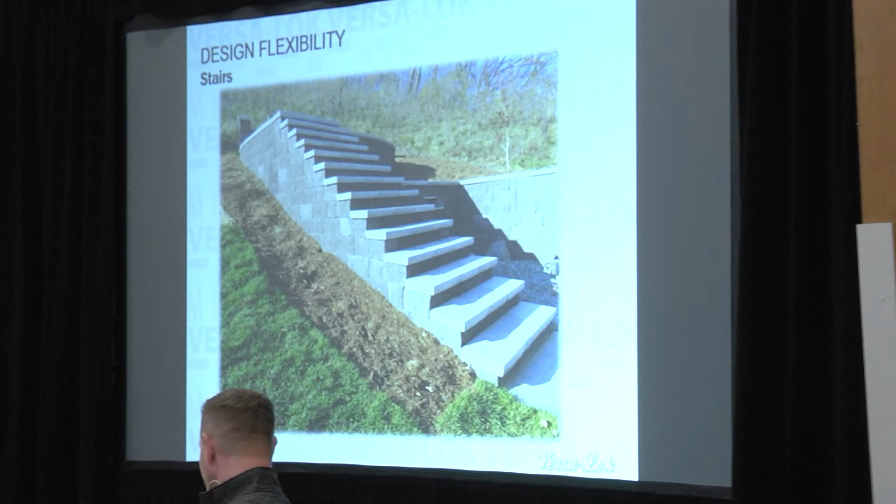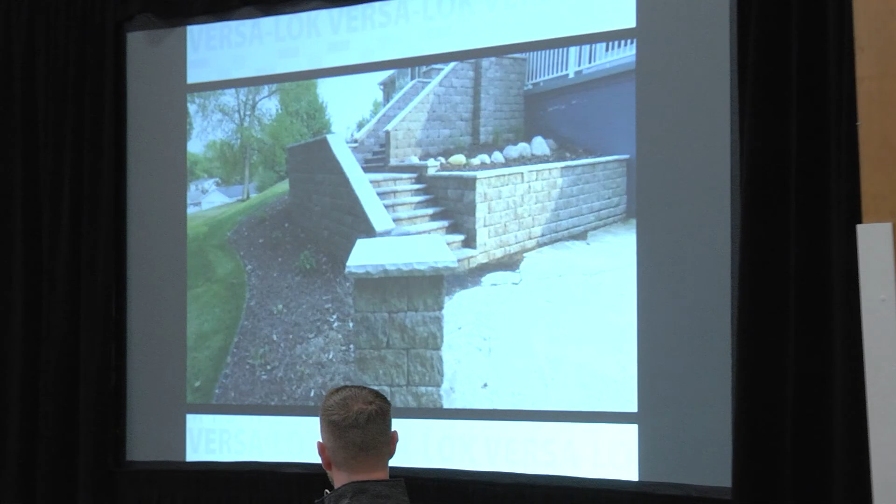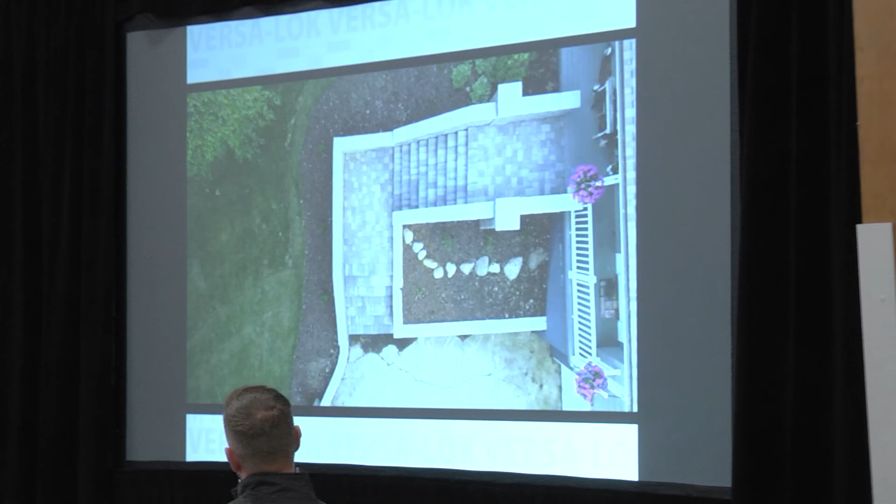So here's a nice shot. I mean, talk about cuts. That looks like tons of fun, trying to cut those blocks at an angle like that. But again, it's a finishing touch. I'm sure he charged accordingly for that, and it looks great in the pictures, right? So the extra effort pays off. I mean, here we are using it in our seminar. So sometimes it pays to go a little bit outside the box and do some really cool stuff like that. You get paid for it, make extra money, do something unique that makes your company stand out.

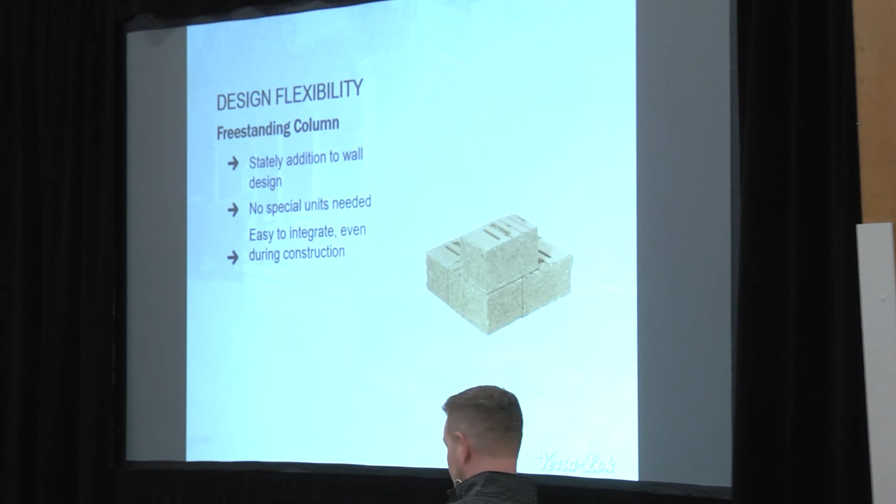And again, columns, great money makers, easy to stack. This is like a cat chasing its tail, right? You're gonna set your base row up, and then your second row is gonna have an overlap. We're gonna glue all that together. You can stack it up to, I believe, 4, maybe 5 feet. We'll go over the installation software just after lunch, and we'll see how tall the engineering software will allow us to build these pillars. You can go higher, but then you're talking about an engineered plan where you're probably gonna do a core fill. You might have to pour concrete down through the center column to give it a little bit of extra weight and beef.

So we're gonna glue this thing together, 3 rows. So we've got 1.5 feet right there at 6-inch high block. So we've got 12, 18 inches. I usually go about 3 feet with my pillars if they're just decorative.

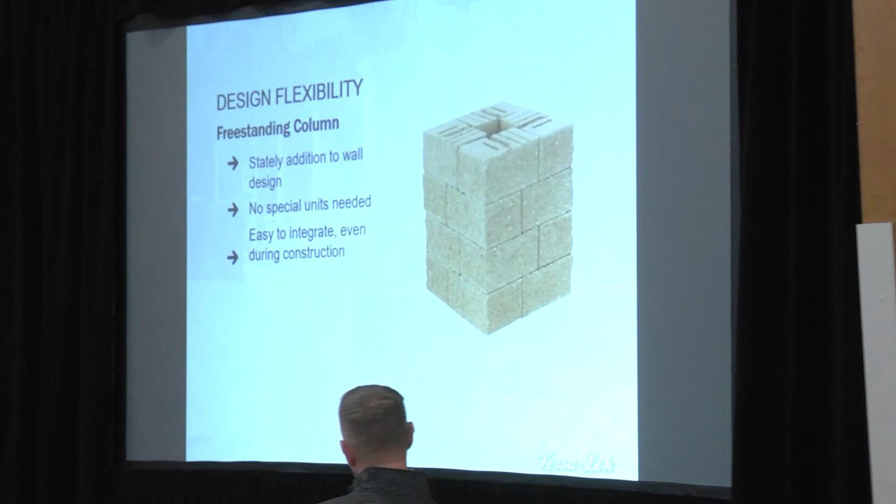Again, this is a situation where if I design this project and it doesn't fit the parameters of the VERSA-LOK estimating software, I'm probably gonna get in touch with my geotech guy, send it over to Paul and see what his thoughts are on it, see if he needs to add a little bit of extra support for these pillars.

Seat walls, same thing. Upsell opportunity, right? You're doing a patio, say you got a $5,000, $10,000 patio, you can really quickly build up $2,000, $3,000, $4,000, $5,000 in seat walls here. And as long as you know the parameters ahead of time, you can design these things to be super efficient and profitable. Stick to that 8-foot outside radius. Don't deviate from that, because if you do, you're going to be cutting every single block on every single row. It's going to take a ton of time. So plan ahead a little bit.

That's where knowing the block capabilities becomes so important. You're not gonna make money if you bid this little seat wall right here at the same price when you don't have to cut as when you do have to cut. You're gonna lose a ton of money on that job, because it's literally gonna triple the time it'll take you to build that seat wall. So make sure you're planning ahead for that.

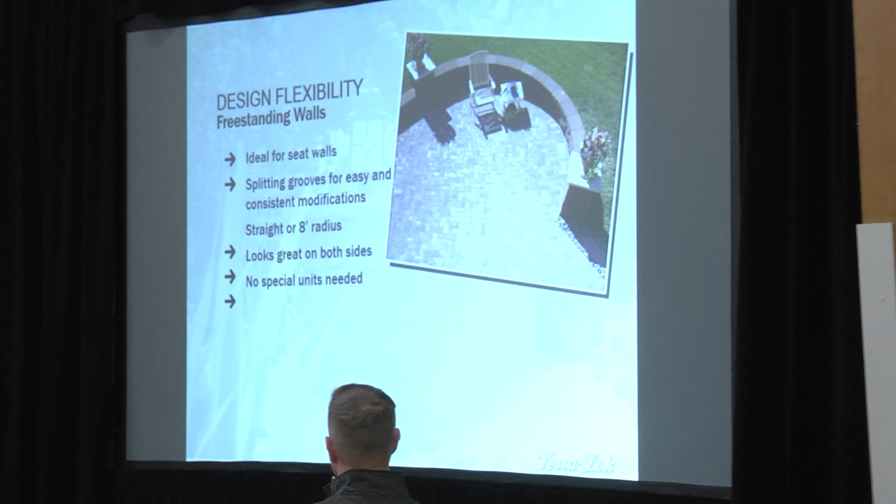Okay, so like Jimmy was saying, the capstones for the seat walls, well, first of all, this is the A-B system. I believe that's the same radius too. So if you set these block walls up correctly, you won't even have to cut your capstones, which I just love doing. You glue it, send everybody home, and it's done. So make sure that you're thinking about block specs as you're designing and installing these projects.

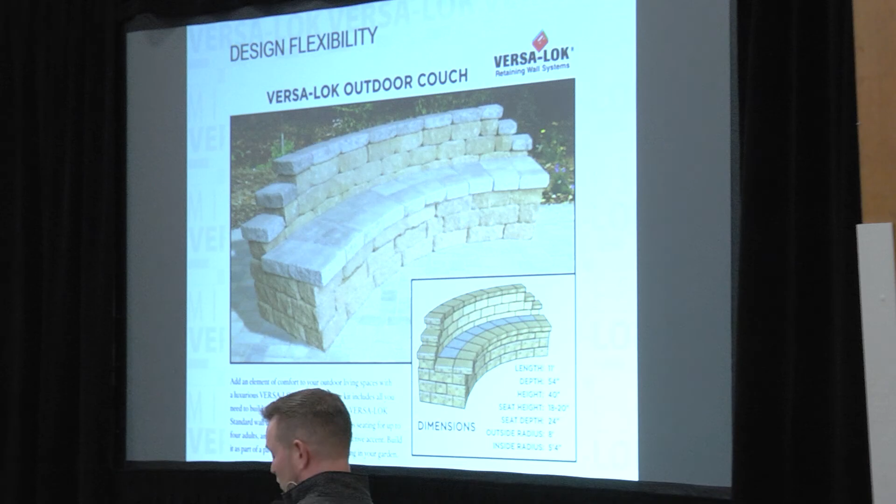We've got kits. This is a kit for the couch. You can see it's tons of blocks, super heavy. I do not believe that we're requiring a frost footing for this. You can still set it on a gravel pad, but that's probably 2-3 pallets of block, somewhere in there. It's quite a bit of block. Make sure you're charging accordingly. You can see the difference between this and the picture that we saw just previous. Those capstones make a world of difference, just kind of dressing things up.

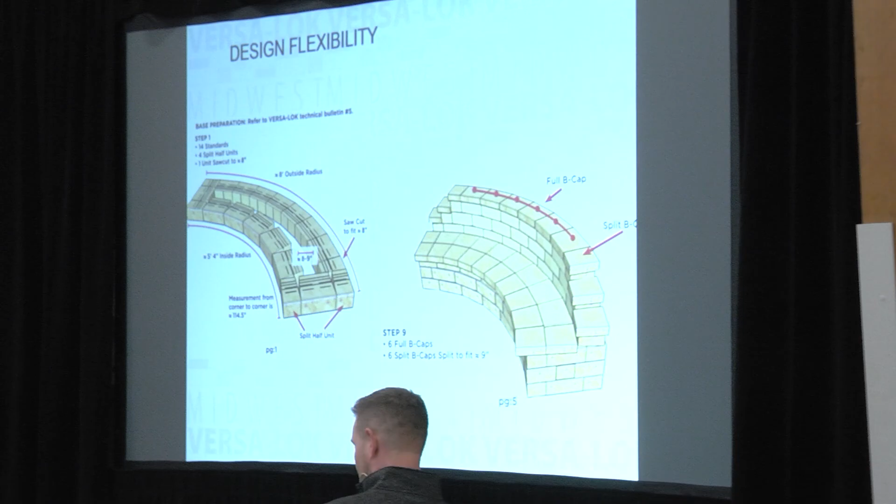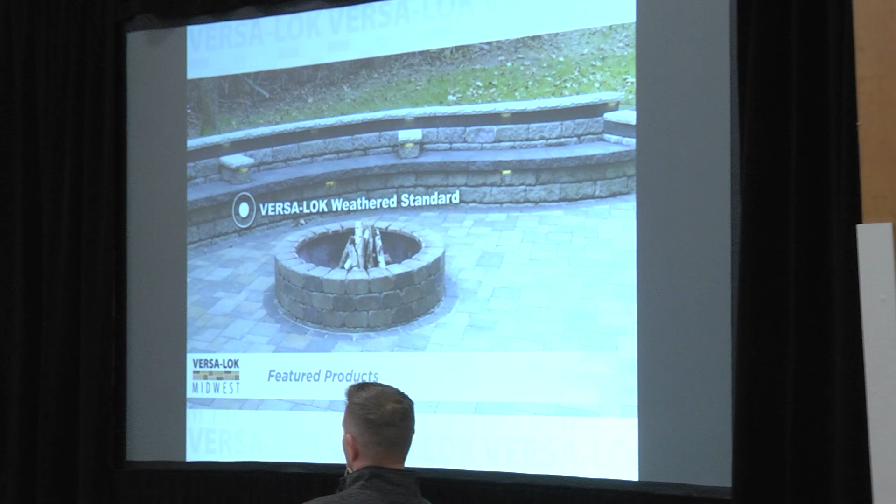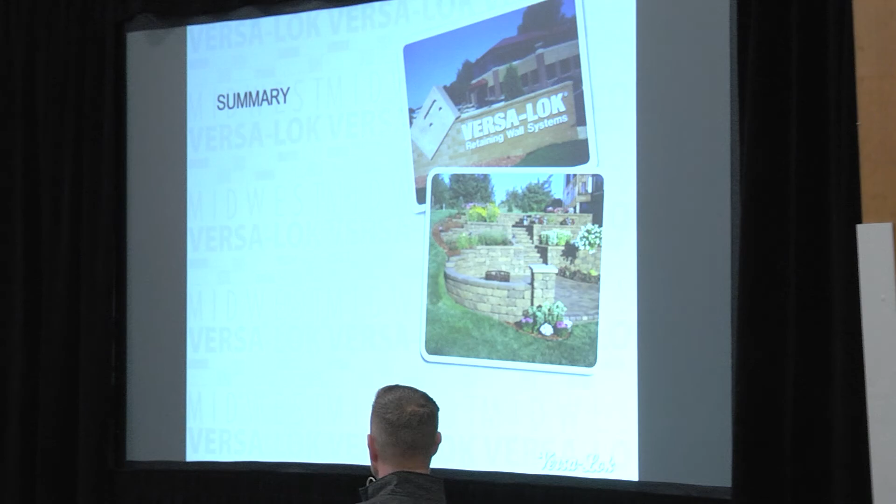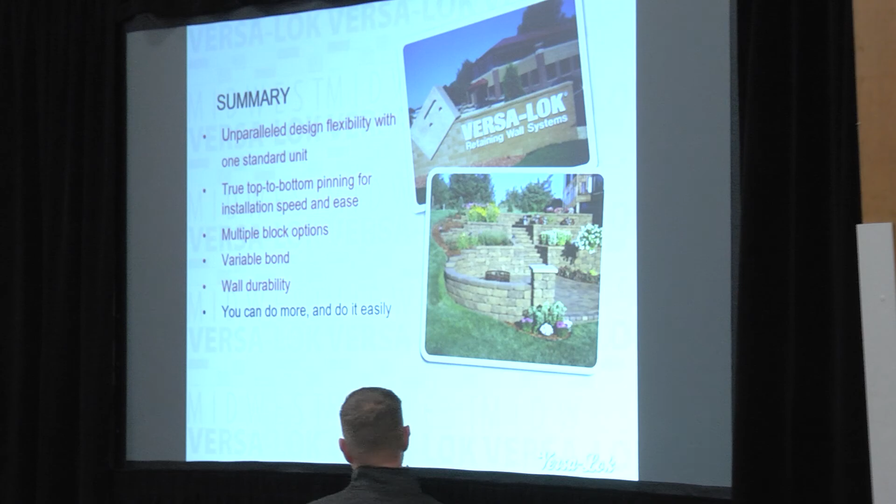So again, we've talked about all this, kind of run through it. Design flexibility, top to bottom pinning, multiple options with the same block, under the same roof, same umbrella, whatever you want to call it, variable bond, just the ability to be very flexible with these blocks. So bottom line, do more, do it easier, right? Make more money faster, work less, enjoy life more. So with that, I think that about wraps up the installation part. Are there any questions?